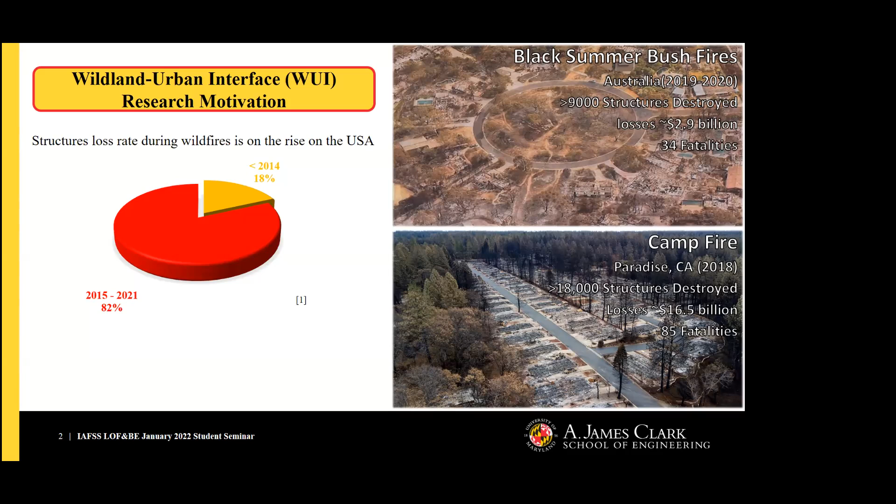So when we look at the research motivation for wildland urban interface fires, typically in the media we see these huge flames, thousands of acres burned. But one thing that's not very accurately captured is the socioeconomic impacts of these wildland fires, with structure losses being one of them. And in the US, there's this compelling statistic that structure loss rate is on the rise, with more than 80% of structures lost within the last 6 years in California. So there's an urgent need to design structures in wildfire-prone communities that can withstand and survive wildfire events.

So when we think about wildland urban interface fire exposure conditions, they typically characterize them into 3 distinct categories: direct flame contact, radiation, or in my case, which I'll be focusing on, firebrands. Post-fire studies also indicate that the ignition of structures due to firebrand exposure has significantly contributed to fire spread within the WUI. So what are firebrands?

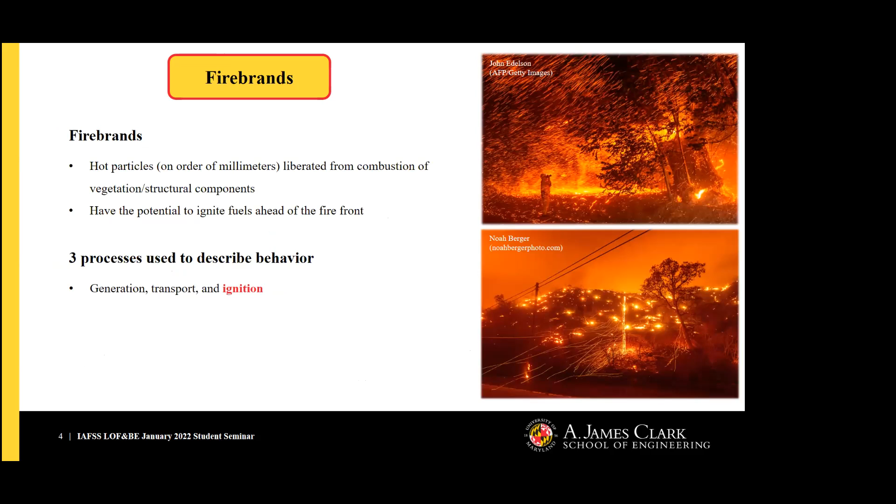They are typically hot particles in the order of a few millimeters, liberated from the combustion of vegetation or structural components, and they have the potential to ignite fuels ahead of the fire front. There are 3 processes used to describe their behavior, typically generation, transport, and ignition, which I'll be focusing on. And then materials that have been used for decks have also been identified as being susceptible to firebrand attack.

So when we consider a few previous firebrand ignition studies that have looked at both singular firebrands and firebrand piles, these post-fire investigations have found that firebrands tend to accumulate in groups. Manzello and Associates has also led a very successful campaign looking at the ignition of common materials when exposed to firebrands, looking at everything from airflow, firebrand pile loading, size, and structural configuration.

Two researchers at the University of Maryland also looked at quantifying the transient heat fluxes from firebrand piles, noting that both increasing the firebrand pile coverage density and the airflow velocity increases the peak heat flux to the surface on which it's exposed. But one thing that a lot of these studies lack is that most firebrand ignition studies do not couple the ignition behavior of a material with the thermal exposure effects of the pile.

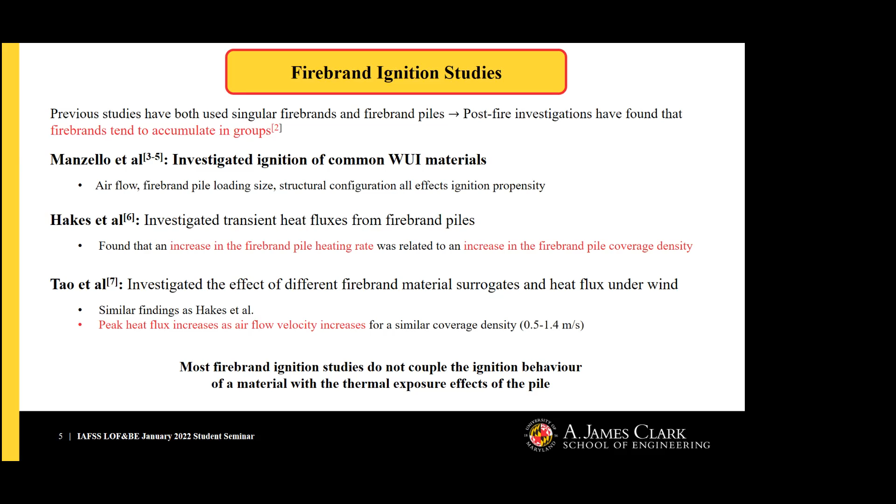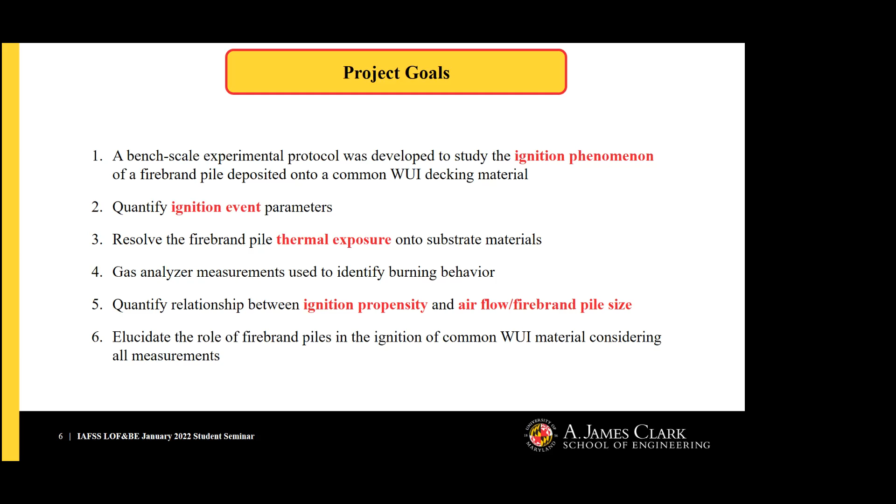So the goal of our project was to design a bench scale experimental protocol to study the ignition phenomena of firebrand piles deposited on WUI materials, to quantify the ignition event parameters like burn time, ignition propensity, to resolve the firebrand pile thermal exposure when deposited onto a material, using gas analyzer measurements to identify burning behaviors, to quantify the relationship between the ignition propensity and airflow or firebrand pile size, and to elucidate the role of firebrand piles in the ignition of common WUI materials, considering all these measurements.

So as I mentioned, we developed the bench scale wind tunnel, and it can be separated into 3 main sections: a contraction cone, a test section, and an exhaust. When we consider the contraction cone, this is where our fresh inlet is, the inlet for our fresh oxidizer, which is moved through a reducer. And it then also comes with a honeycomb mesh, which straightens and laminarizes the flow before it's pushed into the test section.

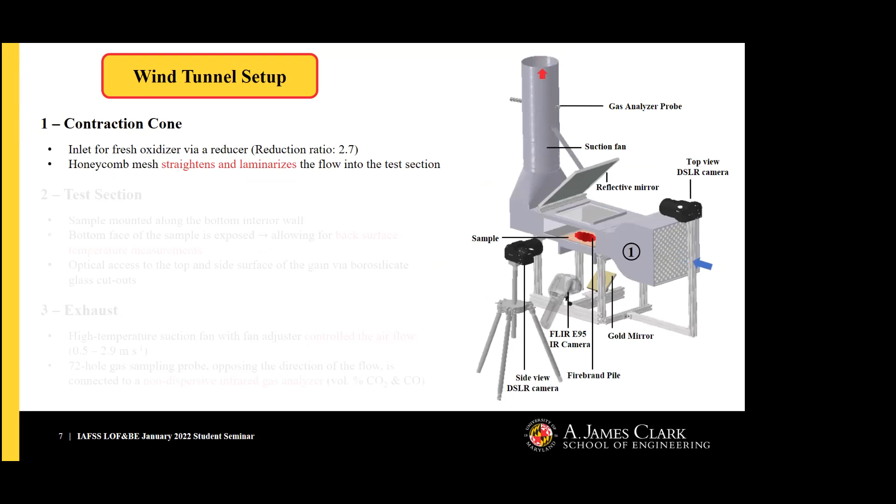So when we consider the test section, this is where the sample is mounted along the bottom interior wall of the test section. The bottom face of the sample is exposed, allowing for back surface temperature measurements using a FLIR E95 IR camera, with a gold mirror also being used to redirect the view of the camera to the back surface of the material.

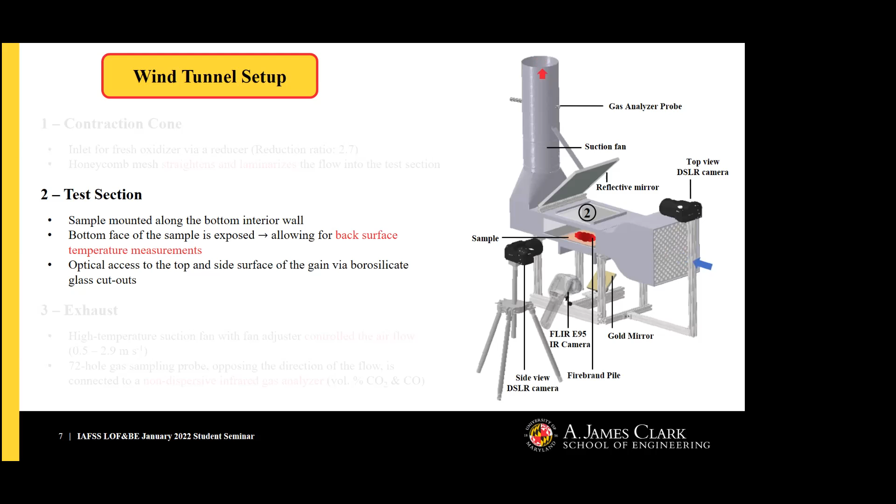Optical access to the top and side surface of the material is gained via borosilicate glass cutouts, with the ignition events recorded using 2 DSLR cameras.

In the exhaust, we have a high temperature suction fan with a fan adjuster to control the airflow, and a 72-hole gas sampling probe, installed to oppose the direction of flow, connected to a non-dispersive infrared gas analyzer used to measure volumetric carbon dioxide and carbon monoxide concentrations.

So just a quick overview of how we run these experiments. The material substrate is placed within the tunnel, the airflow velocity is set, and the firebrands are prepared. The gas analyzer data logging system is used, and the video and IR recordings are initiated. We also make use of back surface temperature measurements.

We deposit our firebrands on the top surface of the material. The back surface is coated with a high emissivity, high temperature black coating, and that's how we actually measure our temperatures. The glowing firebrands are then deposited onto the sample material, the tunnel is sealed, and the experiments proceed until all firebrands are consumed.

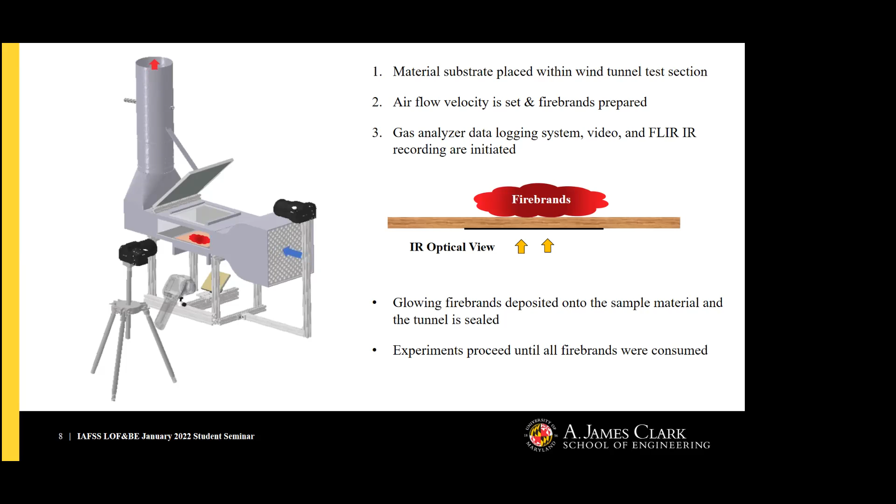The material substrates we considered: we looked at two different substrates, one being Kaowool PM insulation board. This material was selected as it was used to adequately resolve the heat exposure from the firebrand pile. It was also relatively thin, having a fast response and a thermal characteristic time on the order of about 27 seconds. The material is also non-combustible, allowing us to isolate the firebrand pile thermal exposure and burning dynamics.

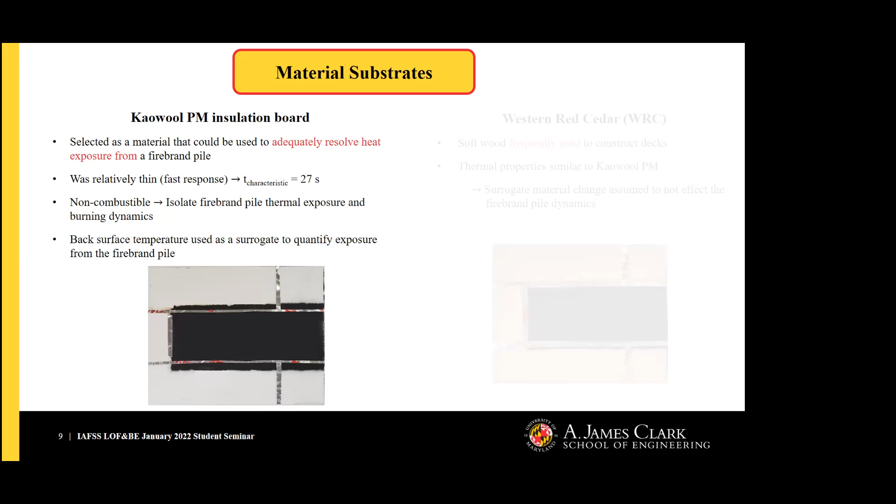The back surface temperature measurements were used as a surrogate to quantify the exposure from the firebrand pile. We also made use of our second material, Western red cedar, a combustible softwood frequently used to construct decks. It was used as its thermal properties were similar to that of the insulation board.

When we move on to our test matrix, we considered two different firebrand pile coverage densities: a smaller firebrand pile representative of a single layer, and a larger firebrand pile indicative of increased hazard. The material surrogates were Kaowool and Western red cedar, with the back surface coated with a high temperature high emissivity paint. We also made use of 4 airflow velocities in the range of 0.9 to 2.7 meters per second, and conducted 9 tests for each condition, equating to a total of 108 tests.

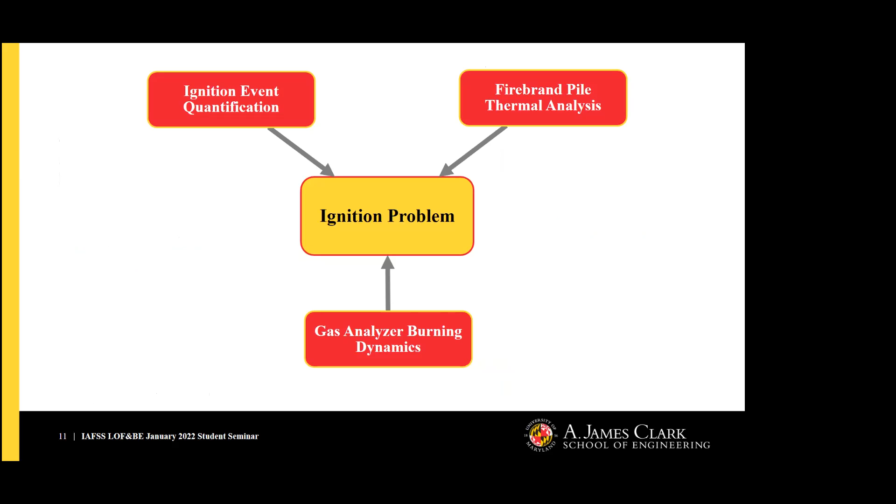When we look at the ignition problem for Western red cedar when exposed to firebrand piles, we separated it into 3 distinct categories: the ignition event quantification, firebrand pile thermal analysis, and gas analyzer burning dynamics, to more accurately quantify and understand the process.

When we look at our ignition events, 2 distinct ignition events were considered: the firebrand pile ignition, and the ignition of the Western red cedar surface. The firebrand pile ignition is indicative of a flame located on top of the pile, typically blue in color. It did not spread further than the pile or result in any noticeable burning dynamic changes, and we concluded that it doesn't pose any increased hazard.

In the case of Western red cedar surface ignition, we noticed that it's more likely to lead to fire growth due to direct engagement of the flammable substrate. It is indicative of the presence of a diffusion flame, typically amber in color, attached to the surface of the board, extending along the length of the board and preheating the surface.

When we consider the flaming ignition location, we noted that the majority of ignitions occurred within or in front of the leading edge of the firebrand pile. This is a result of the front of the pile being directly exposed to the airflow, which promotes smoldering of the board and increased firebrand pile temperature. The surface in front of the pile, free of firebrands, is also directly exposed to the thermal insult from the pile.

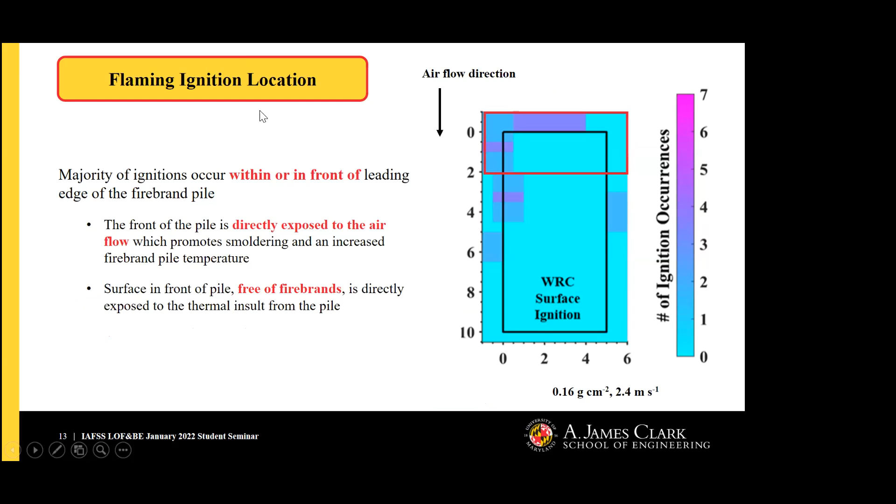Okay, when we now look at the surface ignition probabilities, we noticed that by increasing your firebrand pile coverage density from the smaller to the larger pile, we saw a drastic increase in the ignition probability.

Then looking at the increased or larger firebrand pile mass, we noticed that it was affected by changing the airflow velocity. As the airflow velocity increased, we saw an increase in the ignition probability up to a critical point, after which any further increase in airflow velocity resulted in a decrease in ignition probability.

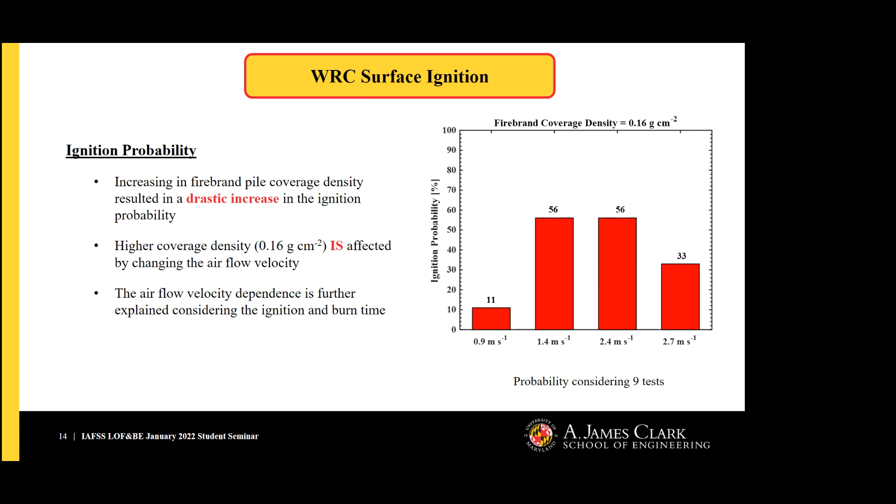If we also look at the ignition time, we note that there is a decrease in ignition time with an increase in airflow, and then a rapid increase with any further increase in airflow. This rapid decrease is attributed to the increased firebrand pile oxidation rate at the surface of the board. As we reach this critical point and increase our airflow, convective cooling and dilution of the Western red cedar pyrolyzate starts to affect our ignition times. Again, this is a qualitative trend where we see a decrease or an increase followed by a decrease.

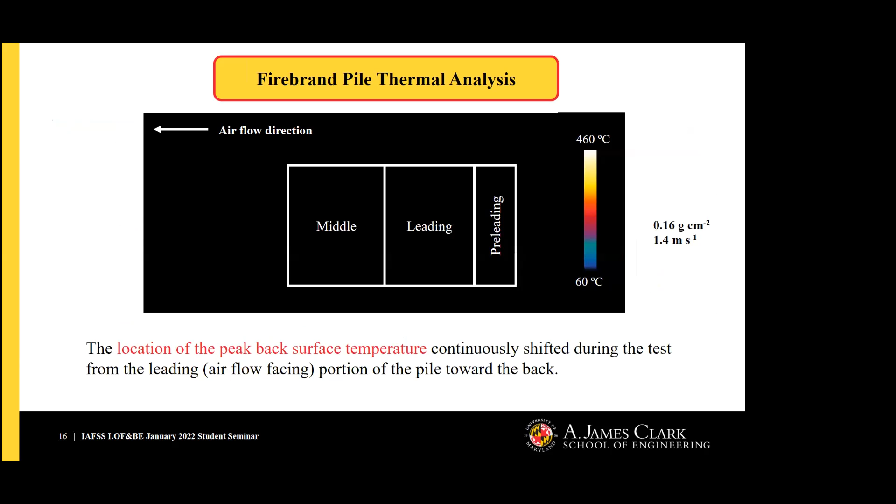When we move on to the thermal analysis of a firebrand pile, as I mentioned, we used Kaowool as the material surrogate. We separated the firebrand pile deposition area into three distinct zones: a leading zone, a middle zone which is underneath the pile, and a pre-leading zone, which was the zone in which we saw most of our surface ignition. It was noted that the location of the peak back surface temperature continuously shifted during the test, from the leading portion to the back portion of the pile.

When we consider some average thermal profiles for our Kaowool firebrand pile thermal analysis, this is just a representative case for a larger pile at 2.4 meters per second. We note that both the leading and pre-leading edge temperatures increase and then rapidly decrease, while our middle zone actually increases and holds steady for quite a long period of time.

It should also be noted that in the time frame where we note our peak back surface temperatures, this is also the time frame where we note most of our ignition events.

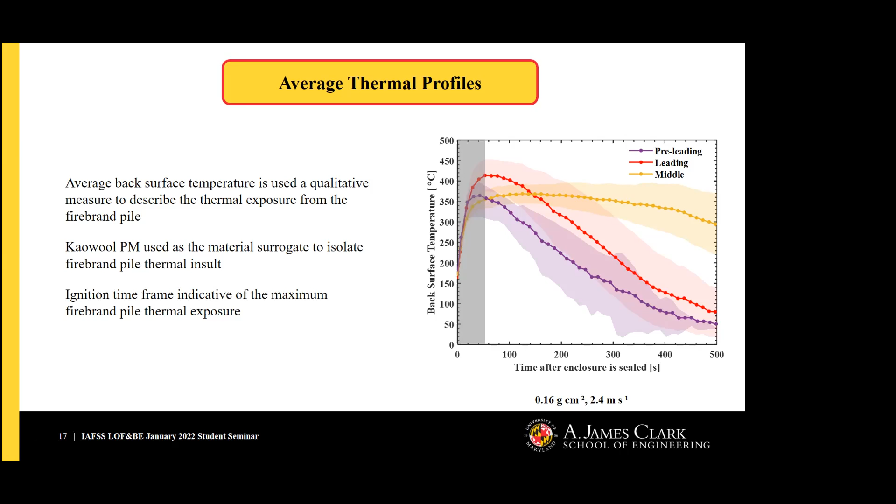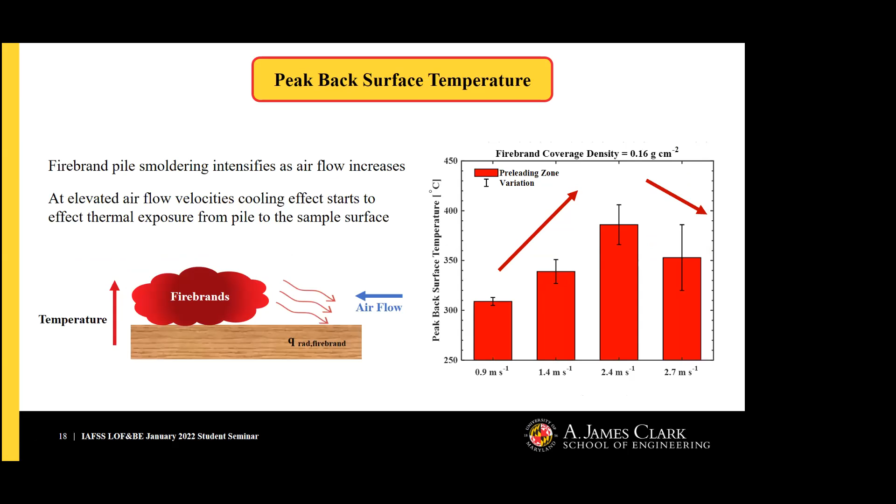Moving on to the peak back surface temperatures, the firebrand pile smoldering intensified as the airflow increased. This is for our larger pile mass. Then at elevated airflow velocities, a cooling effect starts to affect the thermal exposure from the pile to the sample surface. This behavior of an increase until we reach a certain airflow velocity followed by a decrease is also representative of what we saw for our ignition probability, where at elevated airflow velocities there's actually a decrease in the ignition probability of our board.

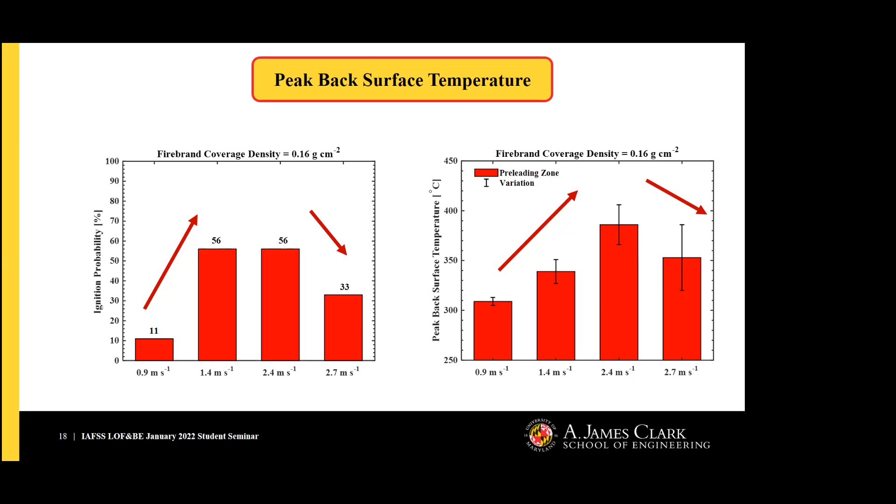Finally, we consider our gas analyzer burning dynamics. The gas analyzer measurements comprise volumetric percentages of carbon dioxide and carbon monoxide, and they were used to elucidate the burning dynamics of the firebrand pile and Western Red Cedar. The heat release rate is typically a parameter used to describe the intensity of burning, and was calculated considering the energy coefficients for carbon dioxide and carbon monoxide and our mass flow measurements of both CO and CO2.

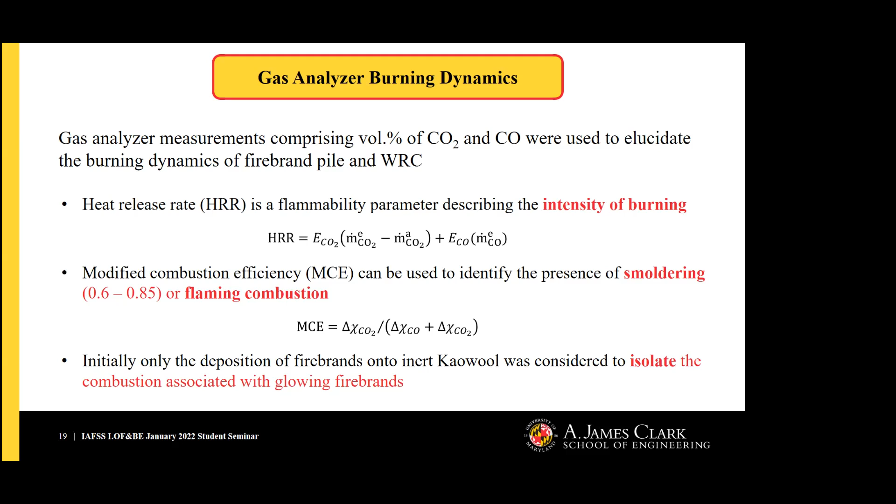The second parameter we considered was the modified combustion efficiency, which can be used to identify the presence of smoldering or flaming, with literature indicating smoldering in the region of 0.6 to 0.85. Initially, only the deposition of firebrands onto the inert Kaowool was considered, to isolate the combustion associated with our glowing firebrands.

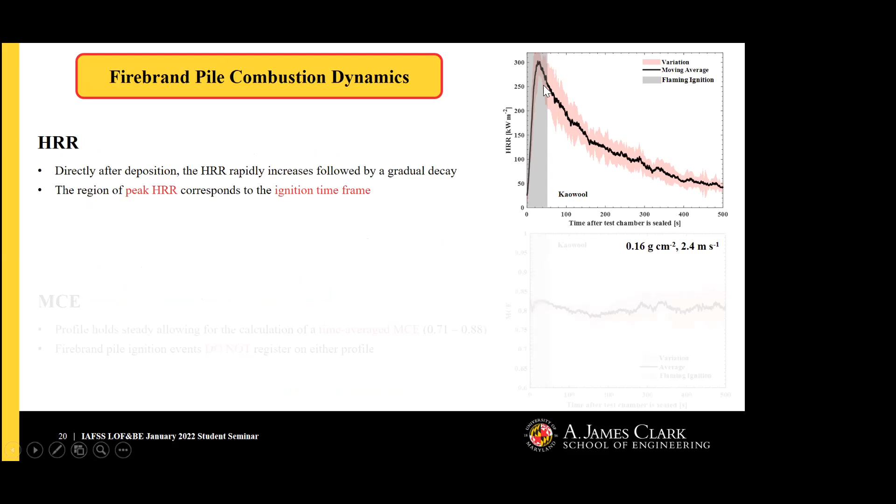So when we consider the firebrand pile burning dynamics, looking at the heat release rate, directly after depositing the firebrands, the heat release rate rapidly increases, followed by gradual decay. We also noted that the region of peak heat release rate is in the same region in which we see our ignitions. Moving on to the modified combustion efficiency, for all our different testing conditions, we noted that it actually held pretty steady.

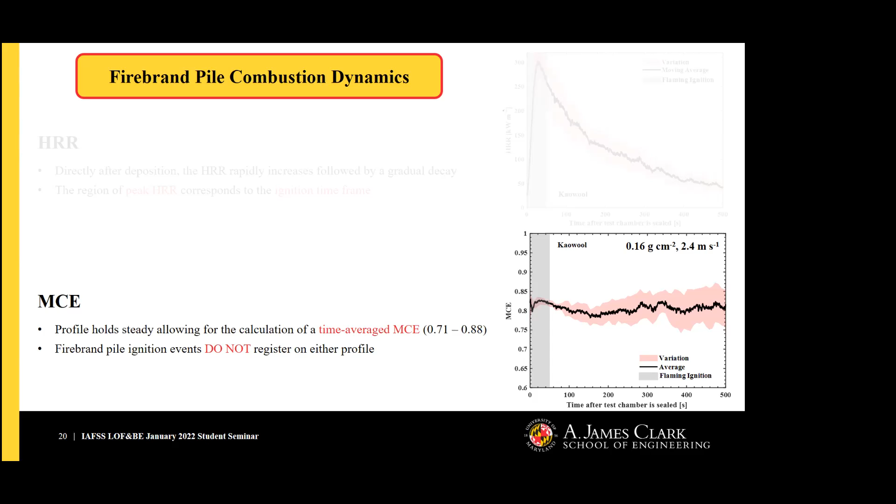This allowed us to calculate a time-averaged MCE for all our testing conditions, which ranged from 0.71 to 0.88, typically in the range of smoldering ignition. The firebrand pile ignition events, however, did not register on either of these profiles. We identified earlier that this ignition event doesn't pose any hazard, and the MCE results actually show that.

Moving on to taking our Kaowool to Western Red Cedar gas analyzer measurements, the firebrand pile Western Red Cedar system burning dynamics was considered, assuming that changing the substrate would not alter the burning dynamics of the firebrands. The Western Red Cedar contribution was isolated by subtracting the system transient carbon dioxide and carbon monoxide volumetric percentages from the Kaowool firebrand pile profile. So on the left-hand side, we see our Kaowool profile on the order of about 300 kilowatts per square meter.

It's normalized also by the deposition area of the firebrands. We take our combined system of firebrand piles and Western Red Cedar, subtract out our Kaowool from our left, and then get the figure on our right, indicating an average profile with the uncertainty or variation of our carbon dioxide and carbon monoxide volumetric profiles.

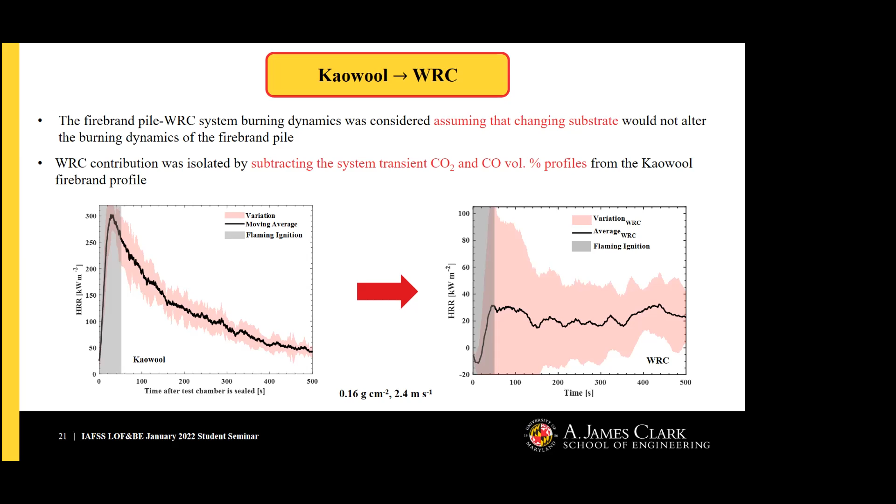The uncertainty is pretty large because we were actually able to pick up or detect the flaming ignition events on the surface using our gas analyzer profiles. And then lastly, the MCE for our Western Red Cedar.

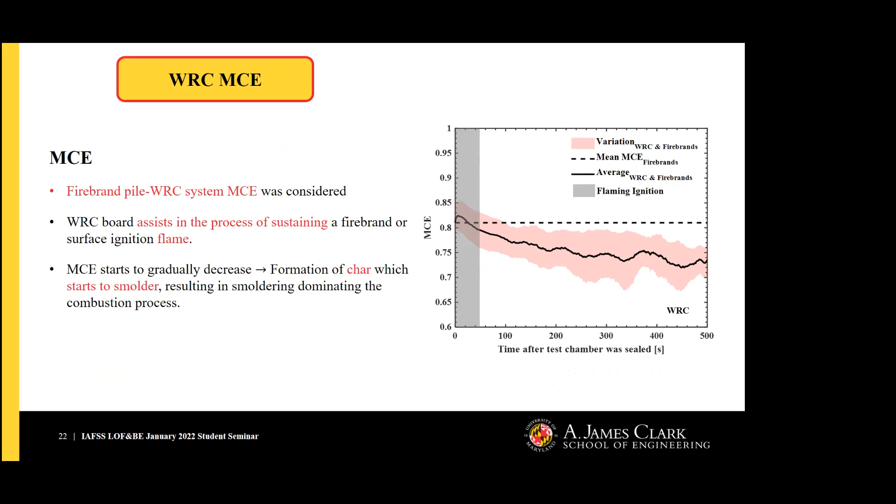The firebrand pile Western Red Cedar system modified combustion efficiency was considered. It wasn't separated. The Western Red Cedar board initially assists in the process of sustaining a firebrand or surface ignition flame, as seen by an increase in our MCE within the region where we see ignitions. And then the MCE starts to gradually decrease as a result of the formation of char, which starts to smolder, resulting in smoldering dominating the combustion process.

So in conclusion, a bench scale experimental protocol was developed to study the ignition vulnerability of Western Red Cedar when exposed to glowing firebrands. The Western Red Cedar surface ignitions were considered more likely to contribute to fire growth. Our firebrand pile heat release rate was orders of magnitude larger than our Western Red Cedar heat release rate, which is dominated by smoldering. Ignitions occur in the front or at the leading edge of the firebrand pile.

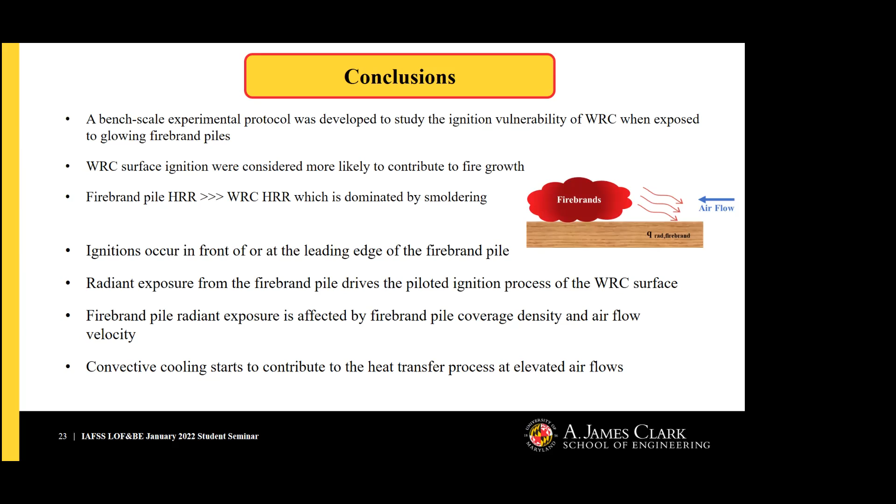This is a very interesting discovery. The radiant exposure from the firebrand pile drives the piloted ignition process of the Western Red Cedar in front of the pile, as noted in our diagram. And the firebrand pile radiant exposure is also affected by the firebrand pile coverage density and airflow velocity. And then at elevated airflow velocities, convective cooling starts to contribute to the heat transfer process.

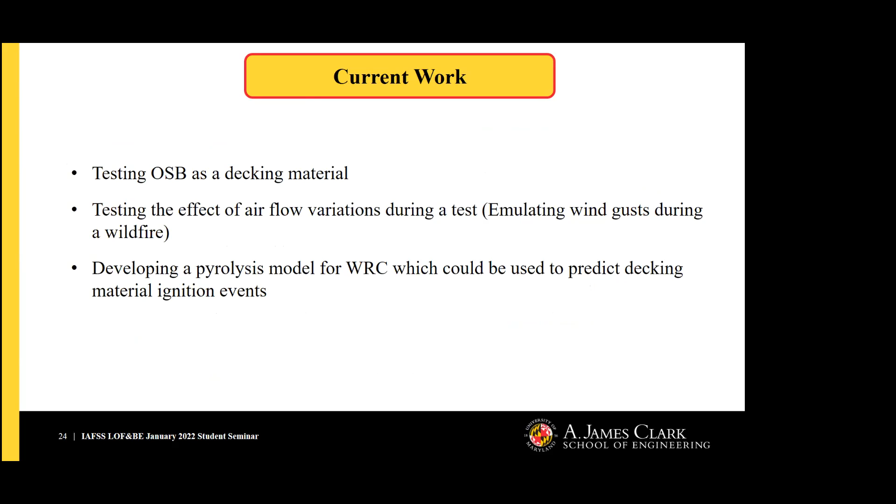So just some recent work that we're busy with, we're actually testing OSB as a decking material. We're testing the effect of airflow variations during a test, thus emulating wind gusts during a wildfire. And then I'm also developing a pyrolysis model for Western Red Cedar, which can be used to predict the decking material ignition events in actual wildland fire events.

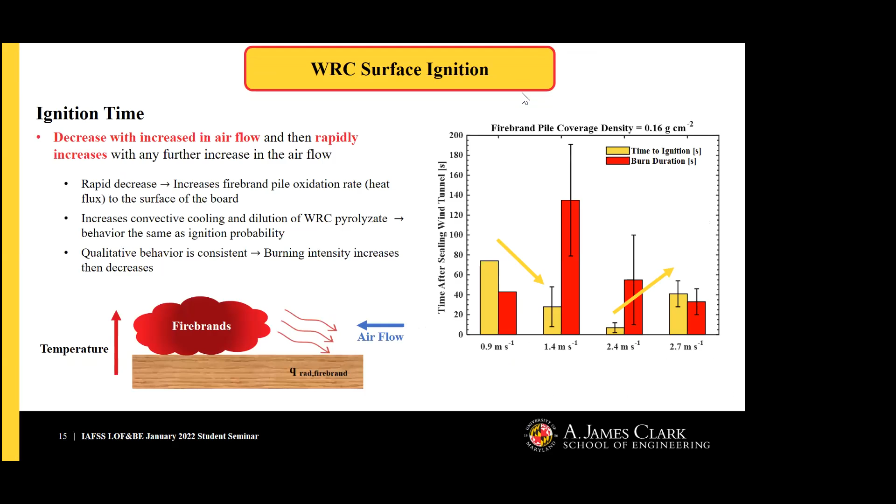Yeah, I can try and elaborate on that. So what we do is, I'll just go back to this diagram, we'll use this as an example. So we coat the back surface with a known emissivity black optical coating, which we've also validated using thermocouple measurements under a radiant heater coil at a known heat flux. So we quantify our emissivity, and we also note that the emissivity doesn't change with temperature over the range that we're expecting at the back surface.

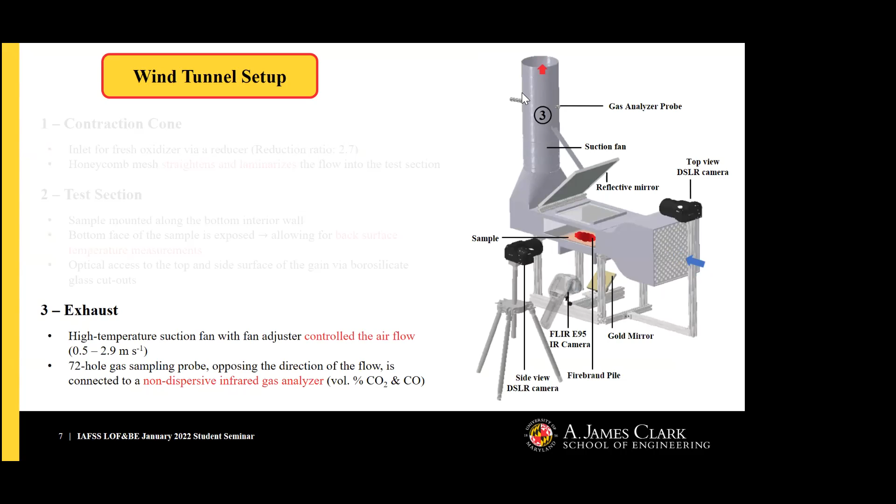And then we just literally position our FLIR IR camera onto the gold mirror with a quantified reflectance, and we then capture the back surface temperature of the firebrand piles, as we see in this image. Oh yeah, here, if that answers the question. So it's all about quantifying the emissivity of the back surface. And obviously we have it as a peak back surface temperature, and I'm actually working on inversely analyzing it to get the front surface temperature, because obviously there's some sort of temperature delay between the front and back surface on which the firebrands are actually deposited.

Right. Cool. I'm assuming your gold mirror is just some kind of gold-plated surface, right? Exactly. Yeah, exactly. Yeah, that sounds expensive otherwise.

There was another question in the chat box: how were you able to make sure you had enough mixing for your gas system? That's a good question. Obviously, typically in cone calorimetry experiments, correct me if I'm wrong, but I think it's like 6 diameters downstream of the actual material. And we were confined because this whole experiment is positioned within a fume hood, so we only had so much space to work with. But we did actually validate our gas analyzer measurements using known composition gases.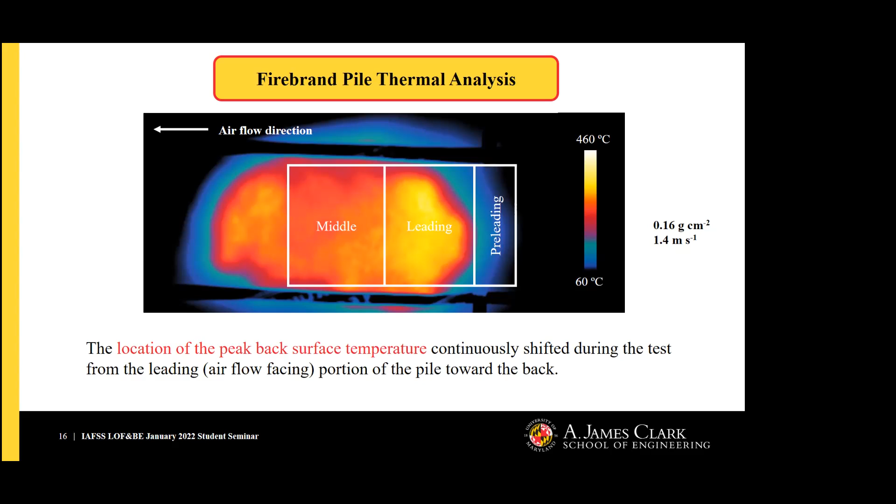So we took a bottle of carbon dioxide and carbon monoxide with a known composition, and we would take measurements and validate it was about a distance of about a foot away from our suction fan, to see if we would get the same measurements as what we're actually purging into our test section. And we validated, I think, within a very close variation—I can't give the exact value right now. But we did validate that to ensure our mixing within the test section, or downstream of that, was enough to ensure we had a well-mixed system. And obviously the turbulence of the fan also increases the mixing of the entire test section.

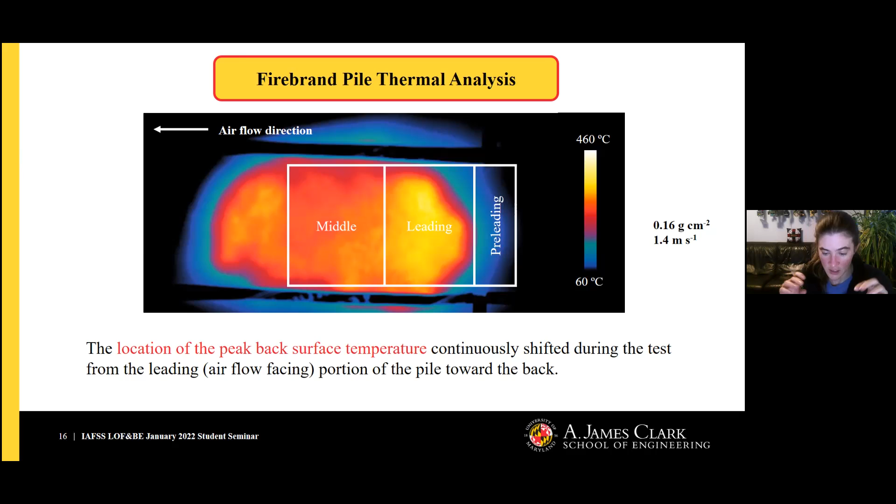We don't have any other questions in the chat box, but I have a really quick one. I was intrigued by the pictures you showed of the ignition events, and how when ignition happened in the firebrand pile, it looked to be more often a blue flame. Was that always the case, regardless of airflow and pile size? Yeah, so typically when we deposit the firebrands and seal the tunnel, we see this flame originate, and depending on the airflow and the firebrand pile coverage density, it depends on how long it sustains there. But in most cases, for the larger pile, we'd see this formation of a blue flame on the pile, and then we'd see the second ignition event where the actual surface of the board starts to engage.

Right. So why do you think it's blue? It's interesting.

That's a good question—we've been speculating about it. Obviously, we could do more measurements, but it might potentially be that carbon monoxide, when it burns, typically burns blue. I'm going off a whim here, but I believe Quintiere has a paper on that, though I'm speaking under correction. That's just a hypothesis. Sounds reasonable to me.

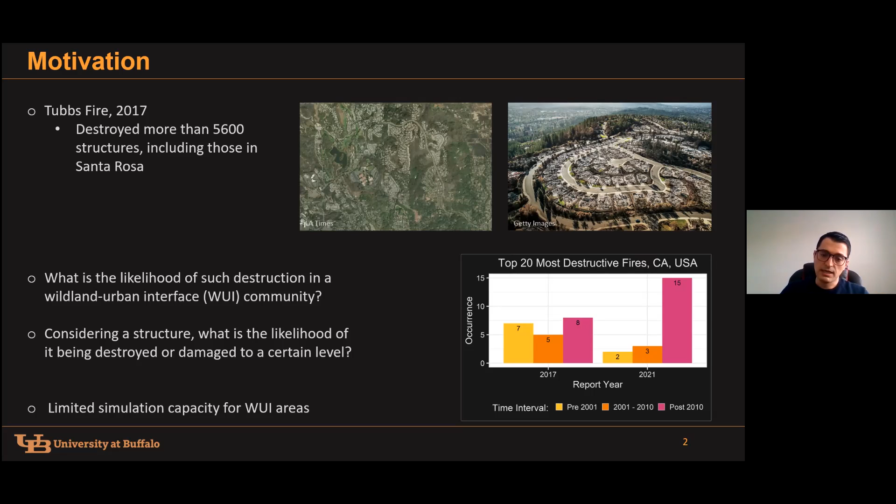We also had a Marshall Fire close to Denver less than two weeks ago, which became the most destructive wildfire of Colorado, albeit it wasn't that large compared to what we usually think of as extreme wildfire cases.

To evaluate the risk associated with wildfires for a WUI community, we need to be able to estimate the probability of the hazard. In this case, probability of fire having a certain rate of spread or burning intensity, for example. Then we also need to estimate if our community of interest is going to be exposed to that fire, and if so, what's the response of our community to that particular fire—how vulnerable is it, how many structures are going to get affected, and how fast would that be.

Well, there are many contributing variables here. We have tons of playing factors in wildland in the first place. And then we have communities with buildings of different sizes and construction materials, various layouts and vegetation, or whether there are mitigation plans in place or not, and so on. And all of these factors come with uncertainties. On top of this, most of these factors are entangled together, and there are dynamics going on between various subsets of these variables, so we also need to take those into account as much as possible.

Now, there is a key difference between wildfire and other hazards. When an earthquake, for example, hits an area, all structures are hit by the same hazard, and their fate kind of depends on their own response and strength. But wildfire is a progressive phenomenon. So when a building catches on fire, not only do we lose that building, but more importantly, it becomes part of the hazard itself.

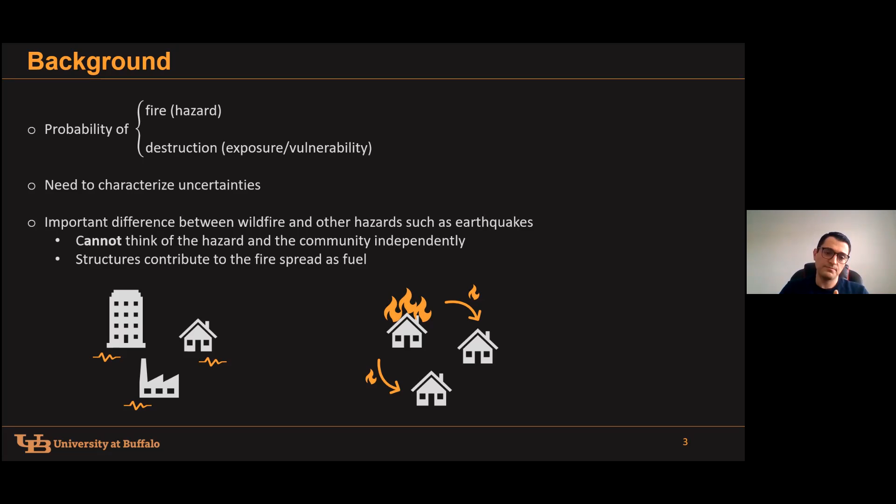Structures burn for a longer time compared to vegetation and also release more heat. Because of this important behavior, when we try to understand what would happen in a community exposed to a wildfire, we cannot separate wildfire from the community. So we cannot think only about one structure, we cannot think only about the community, we cannot think only about the wildfire, but we must consider the wildfire and the community at the same time in the same context.

So in addition to the features we already consider for wildfires, we need to take into account the features specific to the community, like the layout, the relative distance of buildings, their characteristics, their surrounding vegetation, things like that.

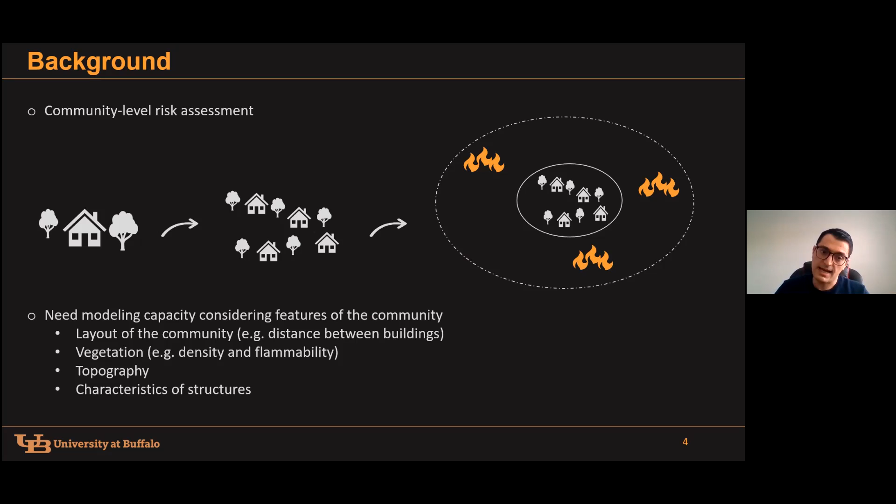To this end, we have developed the streamlined WUI fire tracing model, what we call SWUIFT. It has a spatial resolution of 10 meters and temporal resolution of 5 minutes. It considers structures as distinct fuel. So in SWIFT, we have 3 fuel models: vegetation, structure, and non-combustibles like ponds or roads, like what we see here at the right side of the slide.

This is Fountain Grove community in Santa Rosa. You can see the placement of structures and the layout of the community. SWIFT has 2 of the main mechanisms of spread implemented, fire spotting and radiation, and it also tracks the source of ignition in each building.

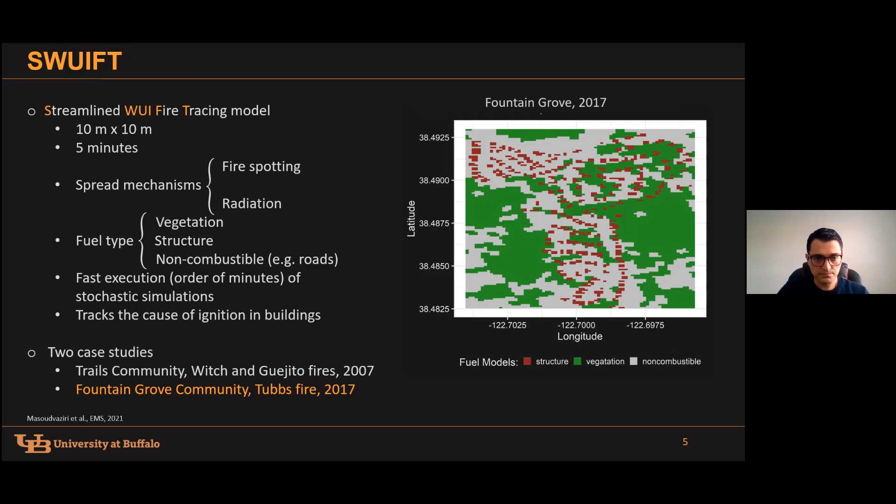One of the important features of SWIFT is its fast execution, so it takes just a few minutes to run a case depending on the domain size and the duration of fire. The model was applied on 2 case studies, which we believe represent different levels of hazard.

Having SWIFT provides us with the opportunity to conduct a stochastic analysis. The model includes different modules, each of which has some variables involved. In this version of SWIFT, we consider firebrands to be similar with the same weight, therefore we can work with number of firebrands. Wind speed is significantly influential on different stages of fire spotting, as we know, and we tried to include those effects as much as we could.

We also leveraged some of the experimental findings in the literature for ignition criteria due to firebrand. One important assumption is that we assume ignition of structures by firebrands occurs due to accumulation of particles on narrow stripes at the edges of rooftops. SWIFT also has radiation implemented, and it tracks the heat received by each building, and there will be ignition if a certain threshold is reached. Based on the available data, or in the simplest form, assuming uniform distributions, we conducted a stochastic analysis varying these parameters, shown in orange, randomly.

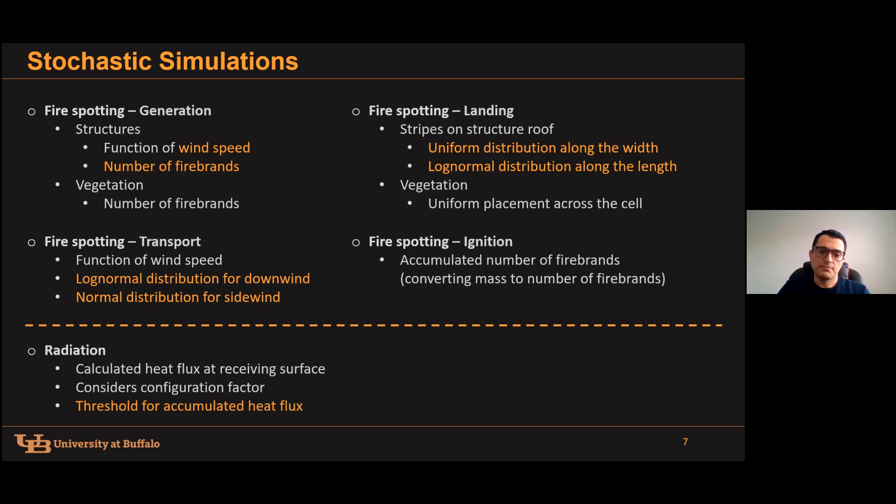Now that we have a fire spread model for community with the capacity for stochastic simulations, we can go back to the big picture and find a way to assess the risk of WUI communities for wildfires. As I stated earlier, we need to estimate the probability of hazard and the probability of what would happen in the community in response to that hazard.

So technically, we are thinking of a sequence of two spread models, one for wildland and one for community. This way, we can run stochastic simulations in wildland and estimate corresponding probabilities, then bring in those fires and run stochastic simulations for each using the community model. This gives us the ability to evaluate loss by conditioning certain levels of outcomes, like damages, to certain levels of hazard.

Hopefully soon enough, the research community will reach a modeling capacity where we can have details of both parts, outside and inside of the community, implemented in one platform. But until that time, this I think is the way to approach the problem.

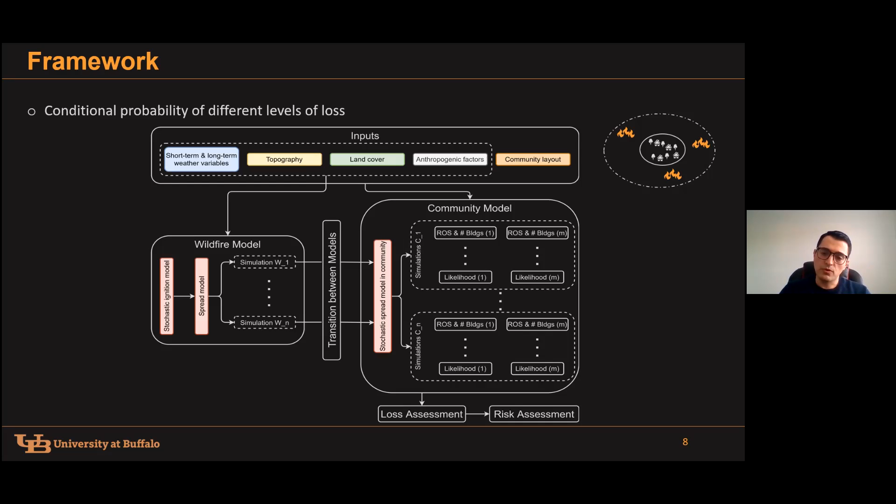To showcase how the result of this procedure would look, we conducted the stochastic analysis of the community for one wildfire, only one. This is the case of the Tubbs fire for the Fountain Grove community. We define the loss in the simplest way, a binary of whether a building ignites or not. Ideally, with more detailed data, we should define multiple levels of damage in future versions, which is one of our research questions.

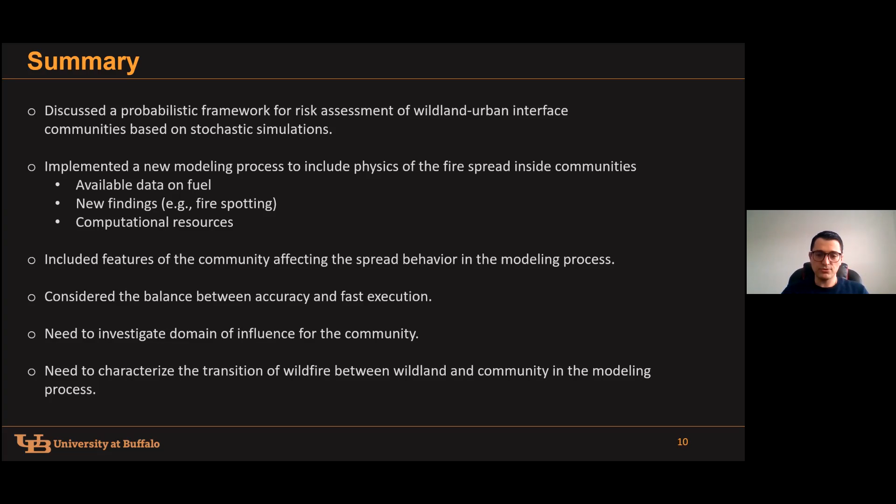This is ongoing work with important unanswered questions and further details to be implemented, but that's actually what motivates us to continue this work.

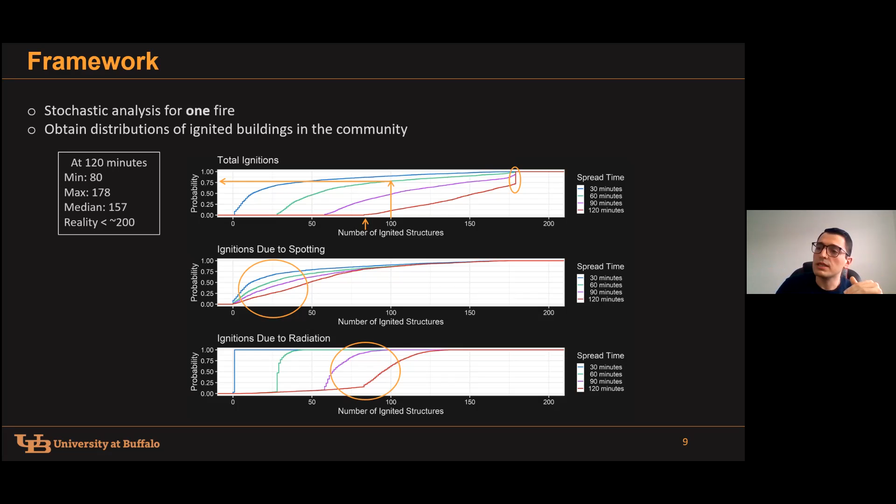Gotcha. Another question asks: in the modeling of inter-building fire spread, are you also including the effects of landscaping and ancillary structures and fencing? That's an absolutely great question. At this point, because of the limited inputs we work with, we only have one fuel model representing structures. So if we have a structure, it's going to be represented the same way as any other structure we have. But with further details, we can implement these details into the model as well. So at this point, it's just a structure, one type, no further details.

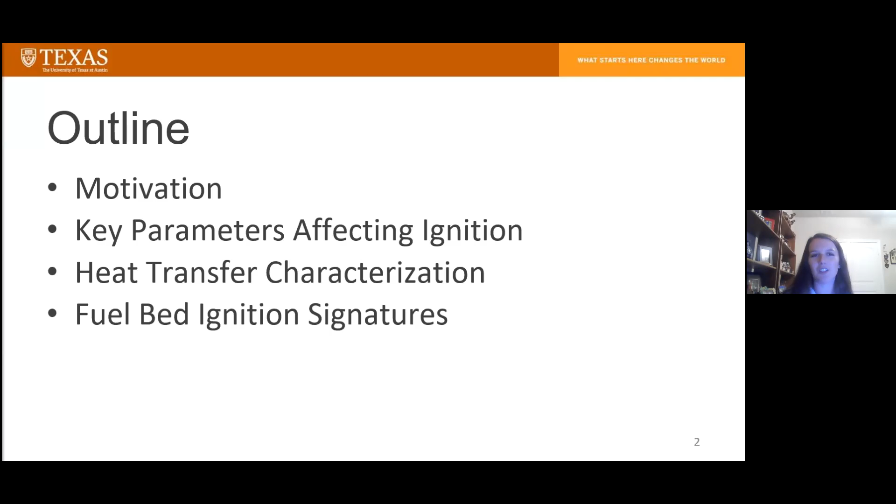I'll be talking about some key parameters that we found affect ignition, some heat transfer characterization, and fuel bed ignition signatures.

Our previous presenters did a really great job of going over the motivation of why people want to study wildfires, so I'll just briefly go through this. Looking specifically at the US, we've seen over the past few years that thousands of structures have burned down, many of them residences. So the ignition of a home is really important to people's livelihoods, something people worry about in their day-to-day lives. Here we'll look specifically at how wildland fires transition to homes through firebrand contact.

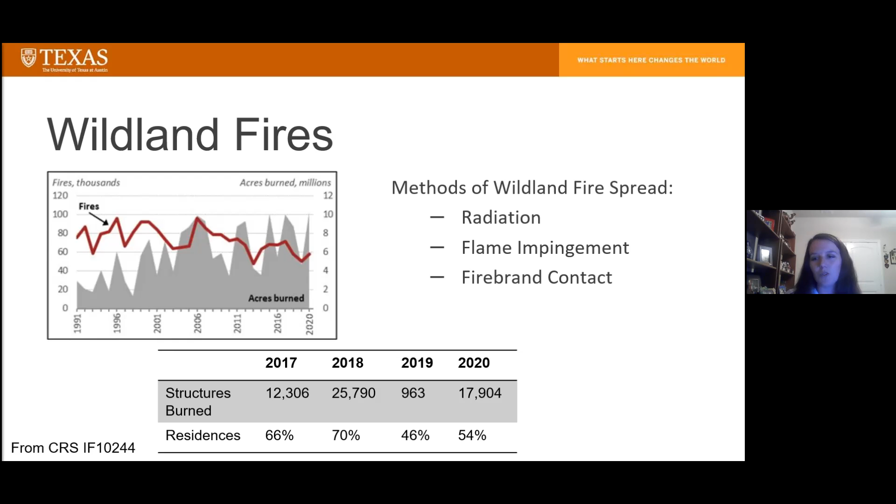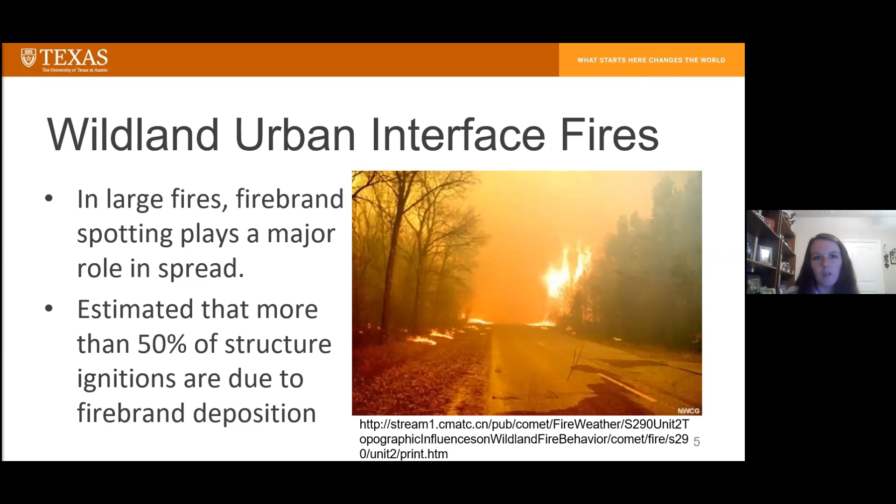So in large-scale fires, firebrand spotting plays a major role. Here we can see a picture of some spot fires jumping a natural break in fuel. It's estimated that more than 50% of structure ignitions in wildland urban interface fires are due to firebrand deposition. These lofted firebrands can ignite homes through a variety of methods, such as debris-laden gutters, flammable roofs, or penetration into attic vents. But we're still looking at what mechanisms are involved in that ignition due to firebrand deposition.

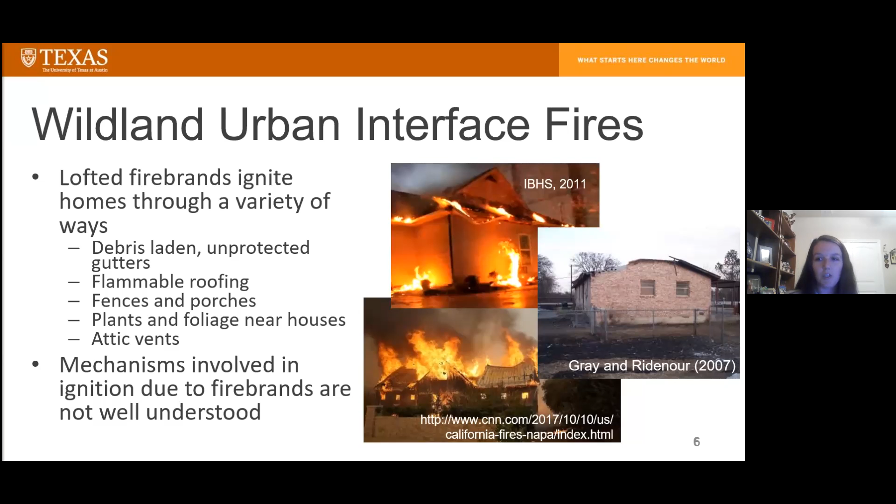My research, more specifically, the questions I wanted to answer in grad school were: what are the hazards associated with firebrand deposition in the WUI, and what threats do firebrands pose to structures in the WUI? More specifically: what physical phenomena affect the ignition of attic insulation materials? What mechanisms affect the heat transfer between a hot body and a substrate? And what methods can be used to determine if ignition has occurred in a fuel bed?

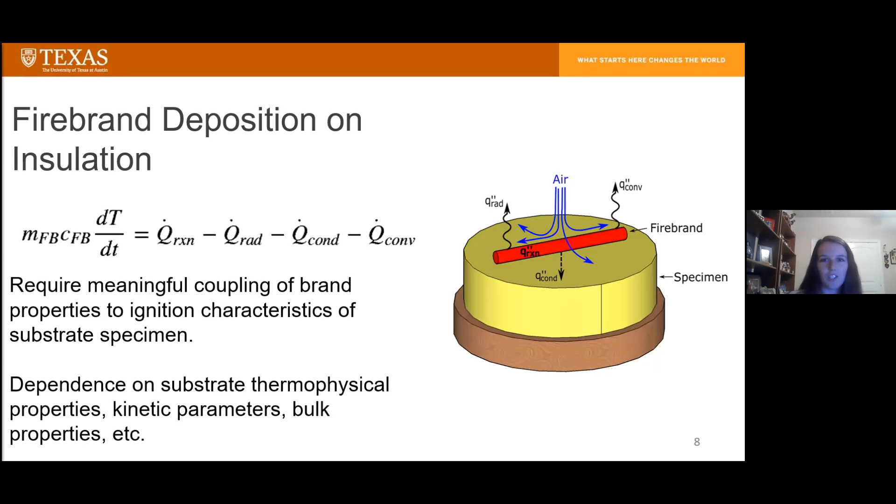Looking at my first set of experiments, I did firebrand deposition experiments to look at the key parameters affecting ignition. If we're just looking at a firebrand deposited on a substrate, we can see this energy balance here - the firebrand reacting or interacting with the substrate and the environment. We need a meaningful coupling between the brand properties and the ignition characteristics of the substrate, looking at radiation, convection, and conduction, and also the reaction within the firebrand.

So a simple experimental setup was designed. Here we have a furnace where our firebrands were generated, either a single large firebrand or 5 smaller firebrands in a pile with the same initial mass as the single large firebrand. They were placed in a furnace and allowed to heat up to auto-ignition, then allowed to flame out within the furnace before being placed as a glowing red firebrand onto the substrate material inside an airflow chamber with an impinging jet flow.

The firebrand was allowed to burn out within the furnace so that any ignition events and flames we saw within the test chamber were from the substrate and not the firebrand.

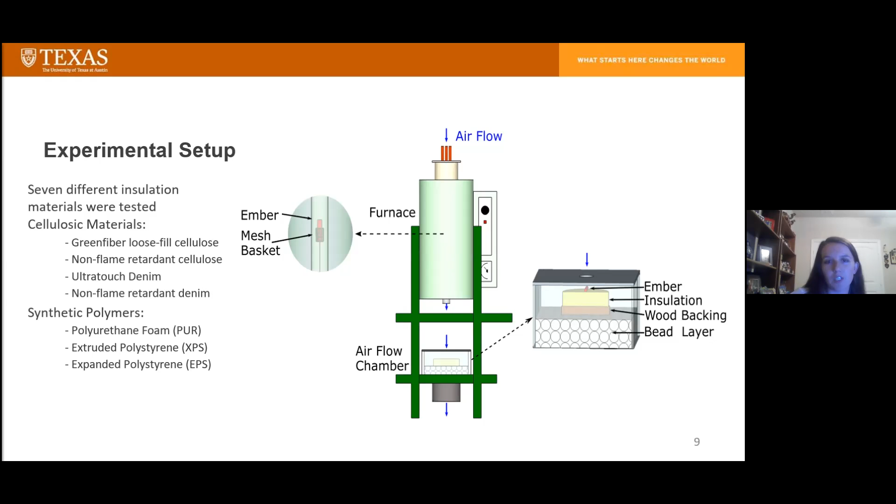Seven different attic insulation materials were tested, with three different airflow conditions: natural convection and two induced flow cases. These are the experimental observations.

Flaming was observed in the cellulosic attic insulation materials for the induced flow cases. Flaming ignition events were never observed for the natural convection cases. The cellulosic materials at the top were denim, non-flame retarded denim, cellulose, and non-flame retarded cellulose.

Flash flaming, which was just brief flames that quickly went out, was observed in the polyurethane and the two polystyrene insulation materials.

For the cases where there was flaming, the time to ignition decreased with increasing airflow, and the fragmented firebrand piles generally had faster times to ignition than a single large firebrand for the same airflow and material.

From this, we saw that the firebrand configuration, whether large or fragmented, and the airflow conditions were the key factors in substrate ignition.

We wanted to find a simple model that could provide recommendations on the propensity of an attic insulation material to ignite. So first we wanted to predict the firebrand temperature evolution.

Here we're looking at the energy balance on a firebrand. In the top equation, we're balancing the smoldering source term from the firebrand with its convective and radiative losses. The bottom equation models the radiation as a two-surface enclosure, and the pile of firebrands was modeled as a hemisphere.

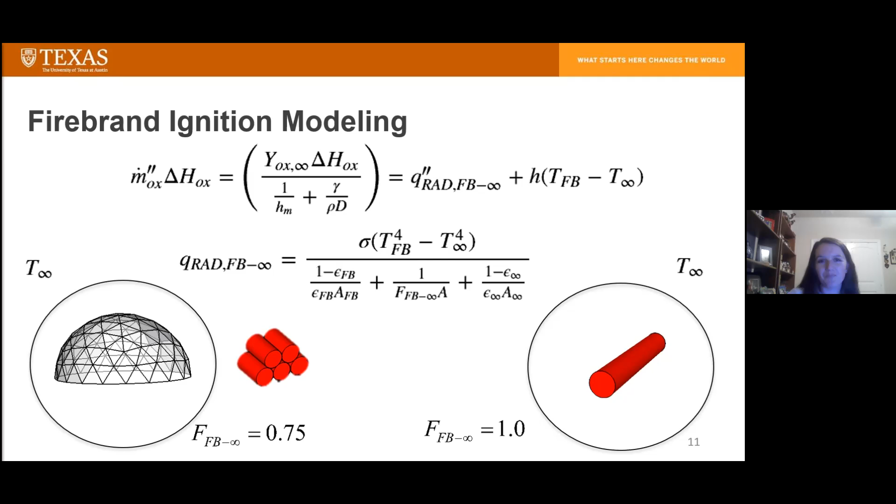We also needed to look at the ignition model for the substrate. We balanced the radiation from the firebrand into the specimen with the sample pyrolysis and the conduction into the sample.

At early times, the radiation-conduction balance resulted in low specimen temperatures, but then there was an increase in specimen temperature with time.

The terms highlighted in red would be material specific to the substrate, and we needed to parameterize them somehow. We used TGA experiments and cone calorimetry, which, for the sake of time, I'm not presenting the specific results for each experiment or material.

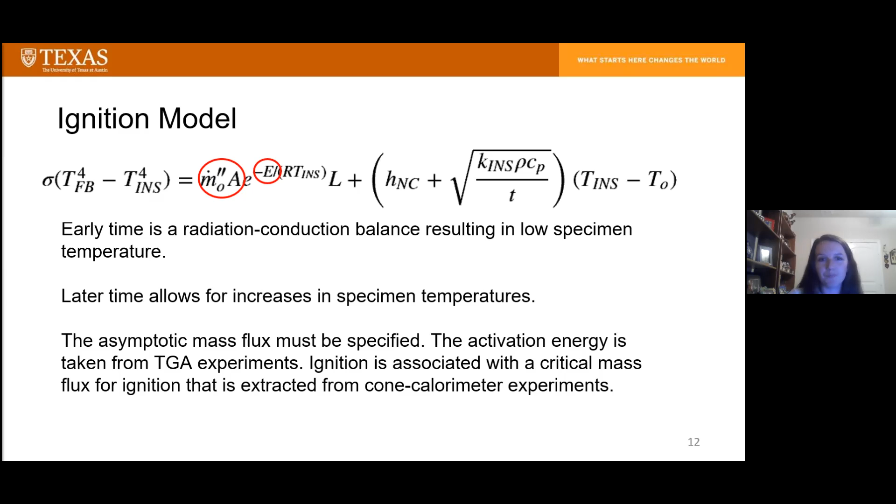This is the result of our ignition model. On the right-hand side, we can see the temperature of the firebrand, which is the red line at the top, the hotter line, and the substrate temperature is the blue line.

Below is the mass flux based on the substrate temperature, and here the ignition criterion we used was based on mass flux.

Looking at the results over time, we saw earlier, more vigorous ignition as airflow increased and with the fragmented firebrands versus the single large firebrands. This model did predict that ignition would occur with the three synthetic polymeric insulations, which were the two polystyrenes and the polyurethane.

But this model does not have any parameters for melting, so that would need to be accounted for, which makes it a little inaccurate in that case. It might mean that flash flaming would occur around those times due to the melting.

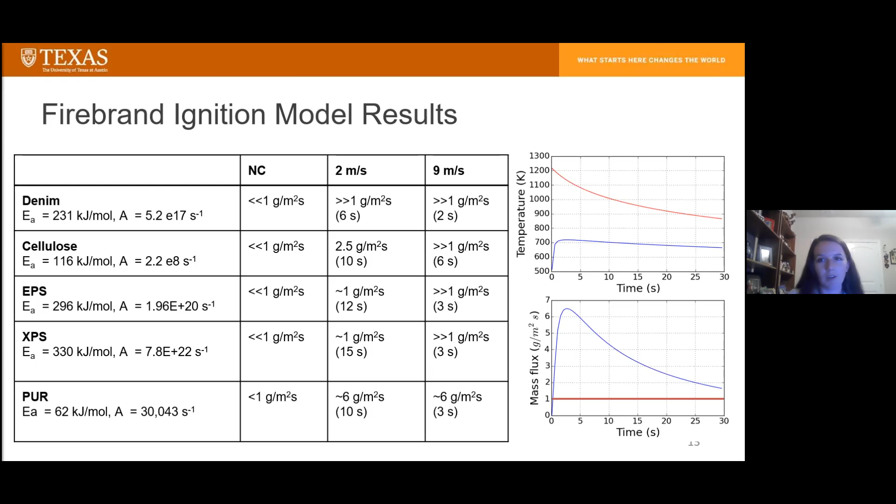These experiments conducted on firebrand ignition of insulation materials showed an increase in ignition likelihood with increased firebrand fragmentation and airflow rates.

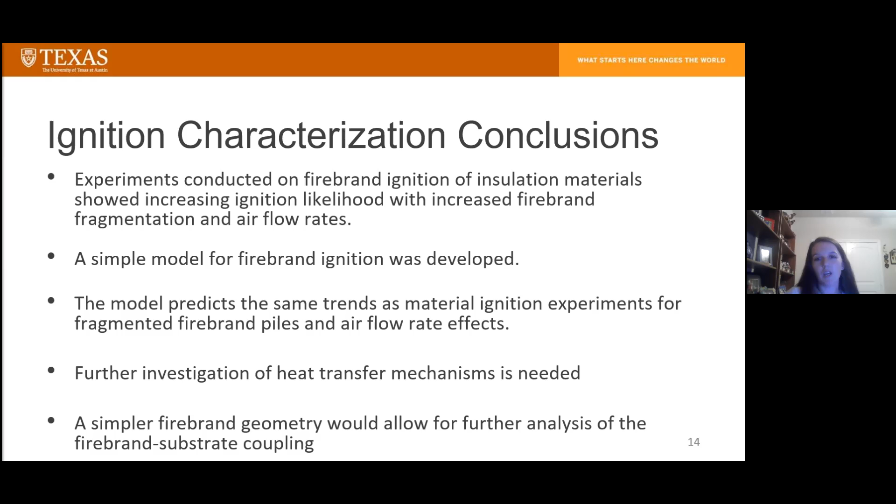We developed a simple model for ignition, and it predicted the same trends as the material ignition experiments. Further investigation is needed into the heat transfer mechanisms, and a simpler firebrand geometry would allow for further analysis of the firebrand-substrate coupling.

Moving on, I also looked at the heat transfer characterization of a hot body deposited on a substrate. In these experiments, I wanted to focus purely on the heat transfer and not as much on the combustion effects.

A surrogate firebrand was used, and the insulation substrate material that was used was calcium silicate, which is non-combustible.

In the previous experiments with the firebrand deposited on the attic insulation materials, we saw that the firebrands would sink into the substrate over time. So we wanted to see how that would also affect the heat transfer if the firebrand was sitting on the top surface or if it was embedded, and that's why we have a bedded configuration and an embedded configuration.

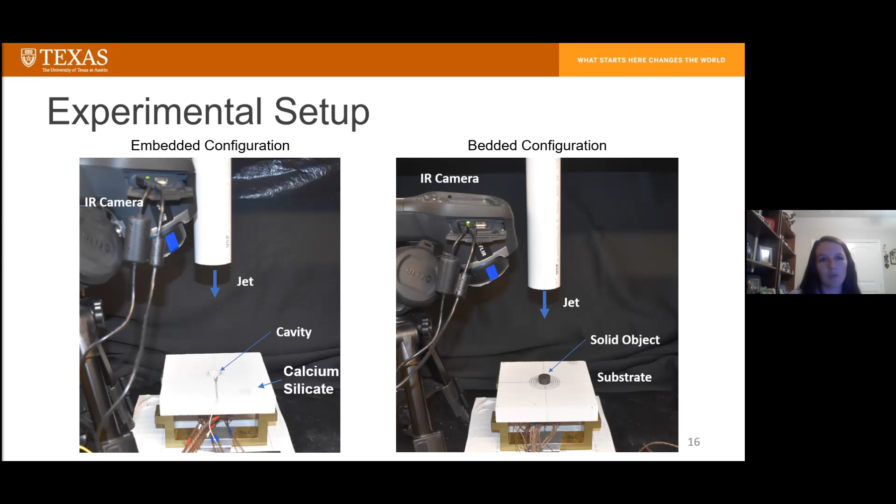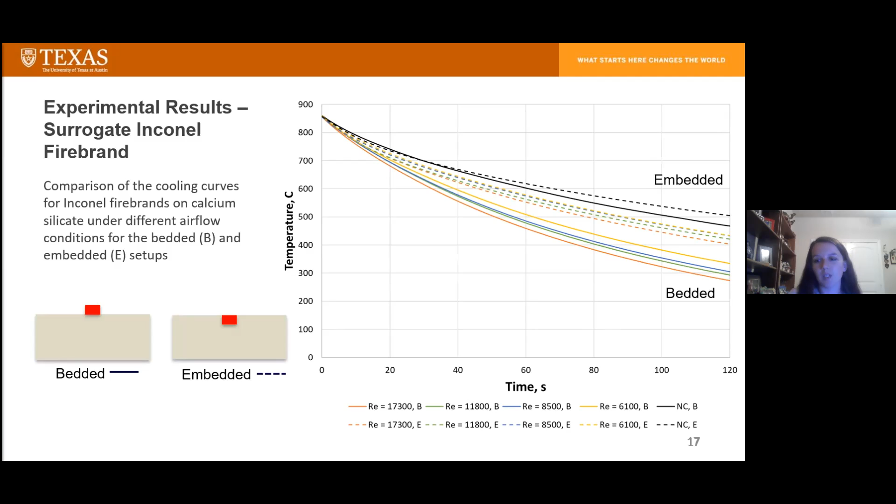So I conducted experiments with naphthalene sublimation in the same configuration to determine the heat transfer coefficients for the different airflow conditions. And then using an optimizer, using the known radiative properties, the known heat transfer coefficient, and the known cooling rate curve for a set of tests, we were able to optimize for the effective conductive resistance. And then that could be used to model further tests.

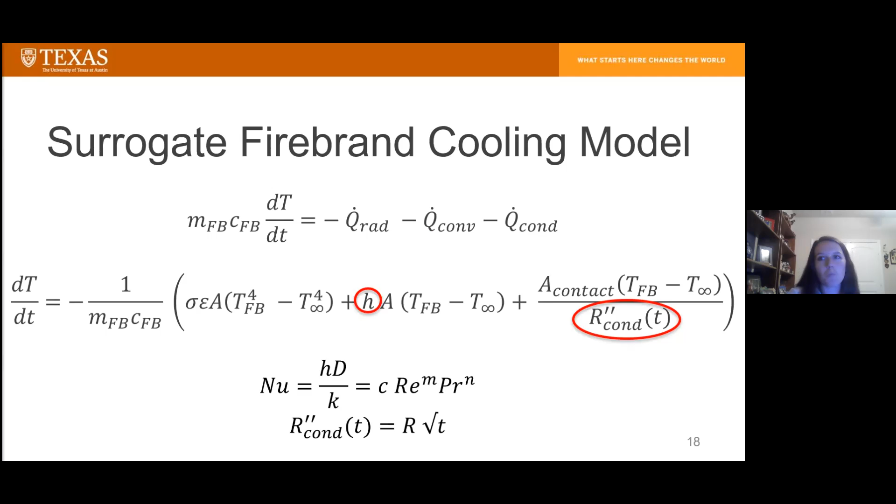And just to look further, the bedded cases were also run with 2 different substrate materials that were also non-reacting, stainless steel and aluminum. And when there was a higher thermal effusivity material for the substrate, we did see higher relative contributions from conduction that were more on the same level as the embedded case.

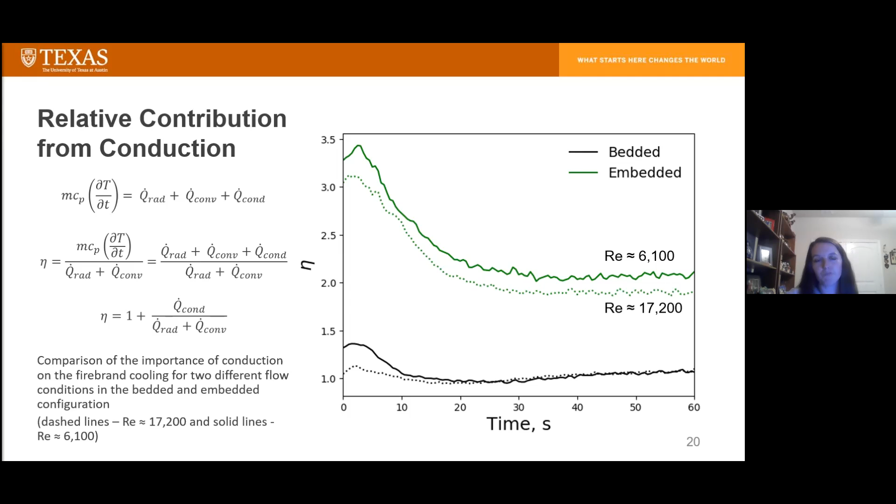So we found that the surrogate firebrands maintained higher temperatures in the embedded configuration. In the bedded configuration, conduction contributed little to the overall cooling, while conduction played a more significant role in the embedded firebrand cooling.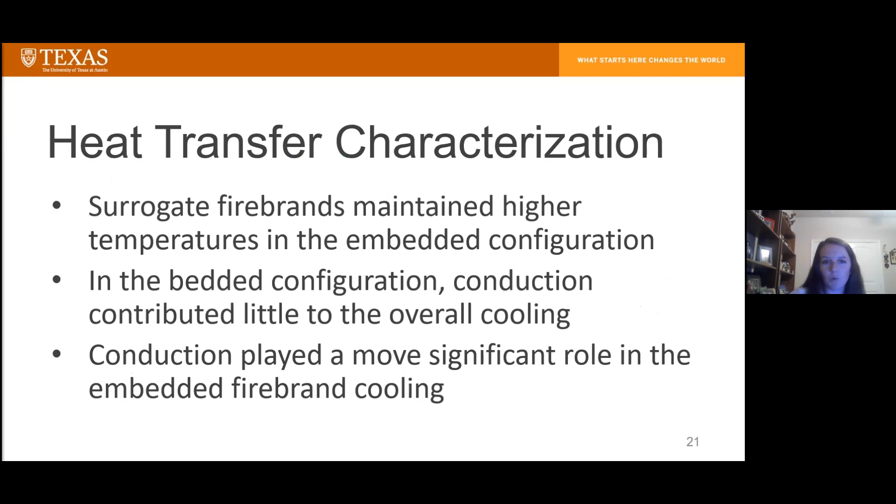And then my final work was looking at fuel bed ignition signatures. So in a lot of firebrand ignition experiments, or just ignition experiments in general, the definition of ignition is a little bit qualitative.

Like, we saw flames, that means ignition occurred, but I wanted to look for a more quantitative definition of ignition, because 2 different people could look at an ignition event and say, well, I only saw a brief flicker of flame, it lasted for 1 second, that's not ignition. And another person could say, yes, ignition is just if we see flames of at least half a second.

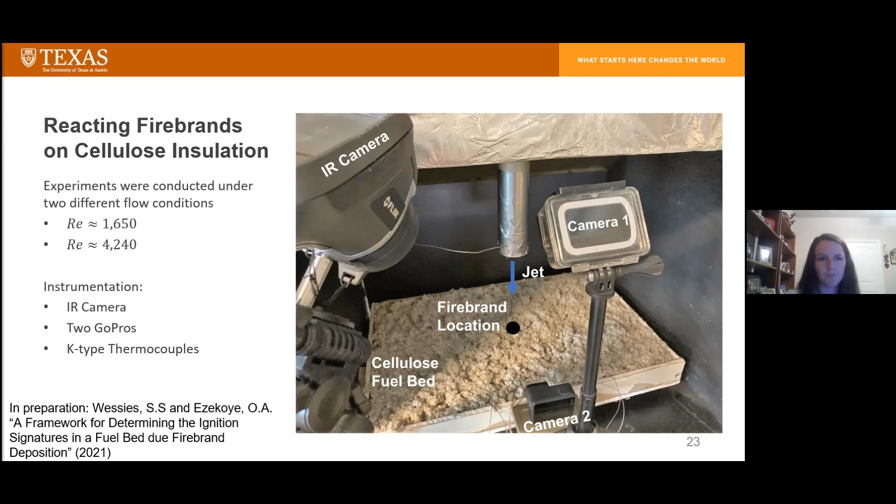So using the same impinging jet from the previous experiments that was well characterized, and cellulose insulation material as a fuel bed, and reacting firebrands that were the same size and shape as the surrogate firebrand, experiments were conducted looking at the ignition of cellulose material. The firebrands were produced in the same method in a furnace to ensure that flames visible in the test were from the fuel bed and not the firebrand. And 2 different flow conditions were tested.

We had an IR camera viewing this test, and the IR camera can be used to look at firebrand temperature, but it can also be used to look at the thermal propagation within the fuel bed. So if you threshold the image at a couple different temperatures, you can kind of see what area was above 500 C or above 800 C at a given time. And we can look at the time history of this for the course of the test to see how the thermal wave is propagating through the fuel bed.

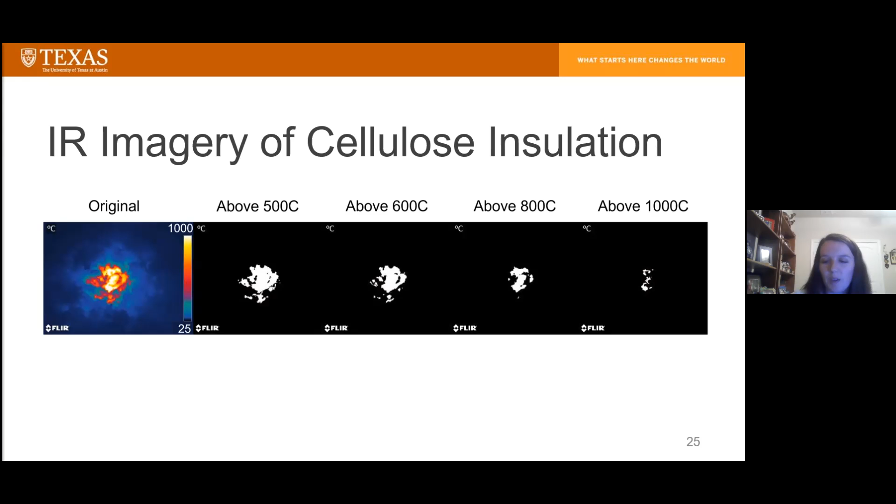So I introduced a non-dimensional reacting area to this: the initial reacting area, which was the initial area above 500 C, versus the current area that is above 500 C. And we look at this over time. So you can see this for the 2 different flow conditions here, and this dashed line indicates where I observed flaming ignition.

Looking at this plot, we can see there are straight line slopes. And whenever you see a straight line slope, you want to see what the slope is and what that growth rate is. This is just me eyeballing it, which isn't the best way necessarily, but we can see that on the left-hand graph there are 3 distinct areas.

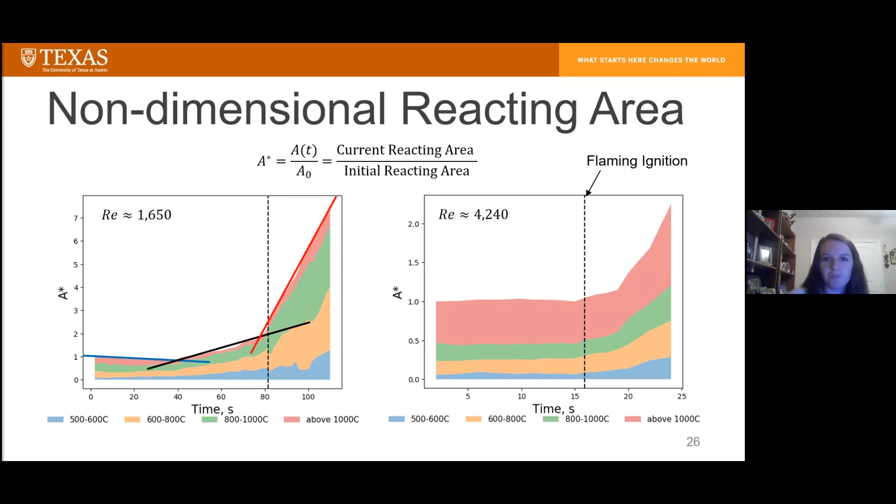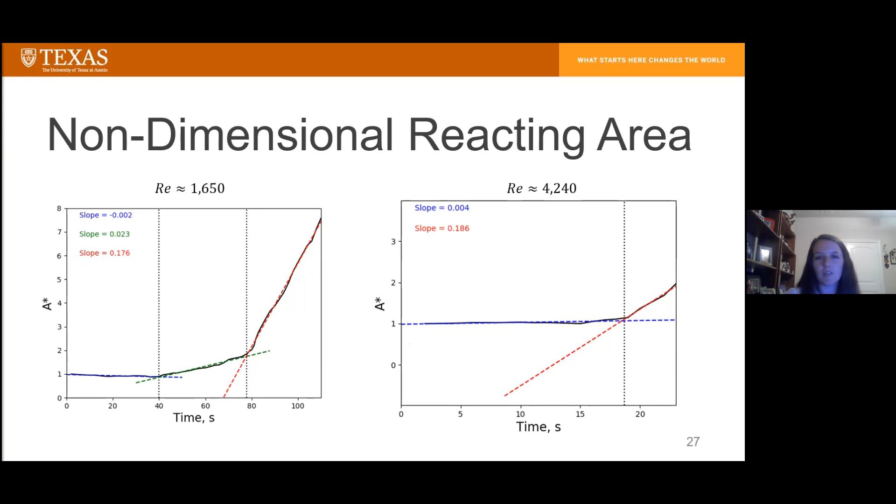Using an optimization method, looking at the times that were best for a split and the best slopes, and how many splits we would also need, I optimized for the slopes at each point to look at how the reacting area, the non-dimensional reacting area, is growing with time. The error cutoff was 5% for these cases. For the lower flow condition, we generally needed 3 phases to have less than 5% error, but for the higher flow condition, only 2 phases were needed.

As I mentioned before, we optimized for the times to the splits, and so that time to the final phase would hopefully correspond with the flaming ignition time, which would give us a more quantitative definition of ignition - that transition to a higher non-dimensional reacting area growth rate. Here at the bottom is the observed time to ignition by me as I went through the test data, and then the predicted time to ignition is from the optimization of the non-dimensional reacting area growth rate. There was pretty good agreement between the cases.

So that was my method for determining a quantitative definition of ignition in these tests. And then these 2 that are pointed out are the tests that were presented previously.

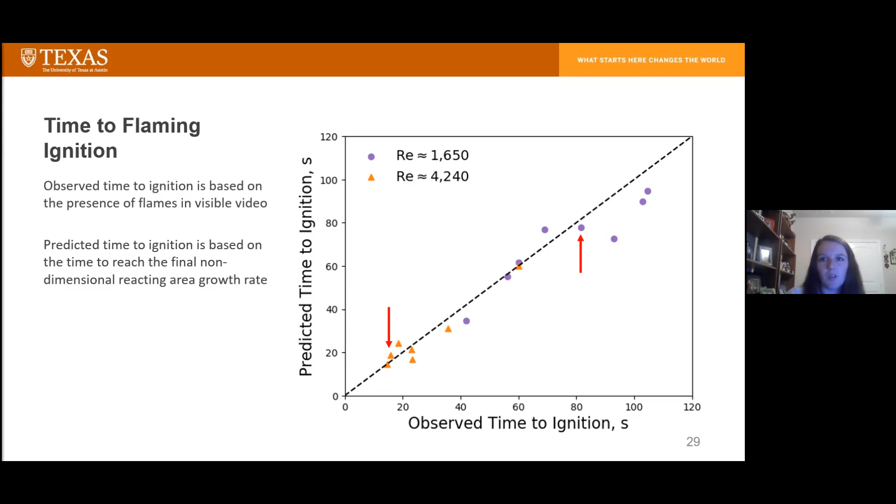So as I said, I was looking at what are the hazards associated with firebrand deposition in the WUI, and what threats do firebrands pose to structures. From my first set of experiments, we saw that airflow condition and geometric configurations affect ignition - increased airflow leads to higher firebrand temperatures and reactivity. From the hot body heat transfer, we saw it's very dependent on the geometric configuration, whether or not it's bedded or embedded. And the non-dimensional reacting area growth rate provides a quantitative definition for ignition.

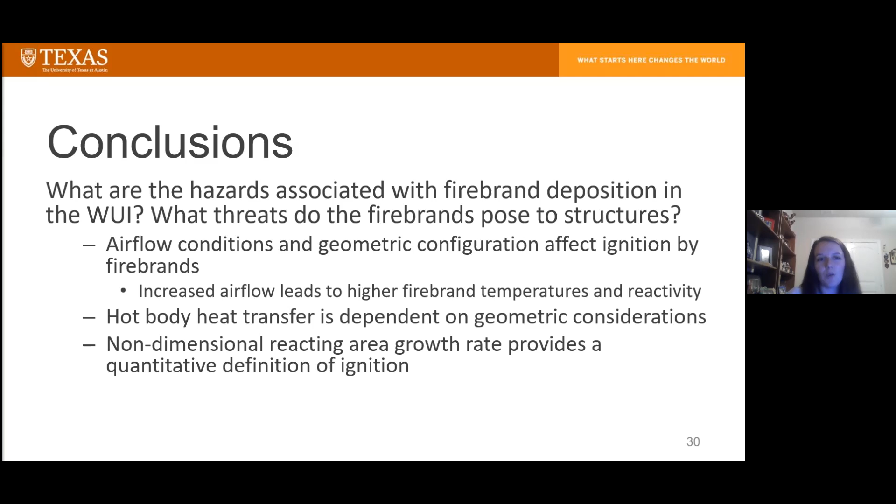All right, thank you, Savannah. That was awesome. Really kudos for going and developing your own convective heat transfer coefficient, because that's really hard work. Good job on that - and all of it. So there's a question in the chat box here.

Can you talk about the contact between the firebrand or firebrands and the substrates that were not smooth, like the denim, cellulose, etc., and if that affected the repeatability of the experiments?

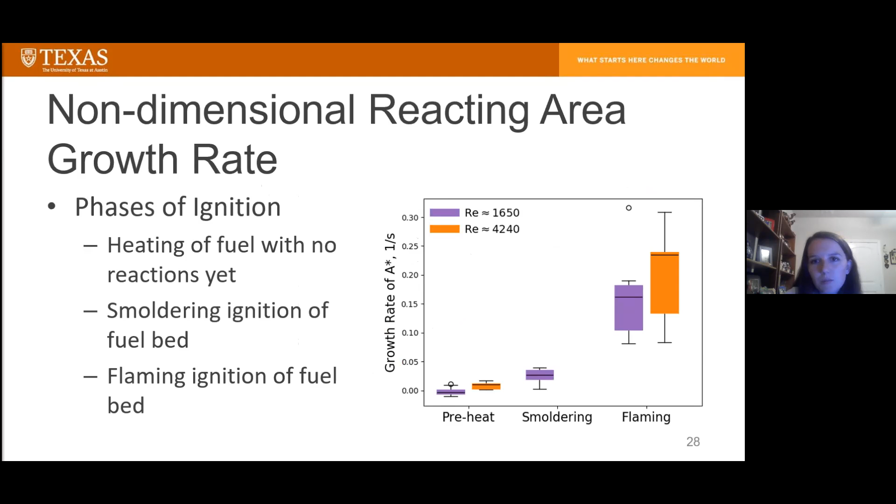I'm assuming that means my first experiments, so I'm gonna go back to an earlier slide. Here we go. So it would affect things, obviously. We did see more variation in the denim and cellulose ignition times versus the polystyrenes and the polyurethane, which didn't really see ignition. We saw a lot of variation, but we attributed that to differences probably in the flame retardant loading, because the flame retardants are added to the recycled denim and the cellulose afterwards, since they're recycled, so they add flame retardants afterwards. But I would say the contact area probably has an effect - the denim and the cellulose kind of deform as soon as the firebrand is placed on it, so it's soft, it conforms, and you actually have more contact area in that case.

Gotcha. I already have a somewhat related question here. As you were talking, it sort of dawned on me that it seems like in a lot of these cases you saw smoldering ignition before flaming, so flaming ignition was kind of a transition from smoldering. Was that true? Yeah, definitely, especially in the last experiments that I did the more in-depth study of ignition.

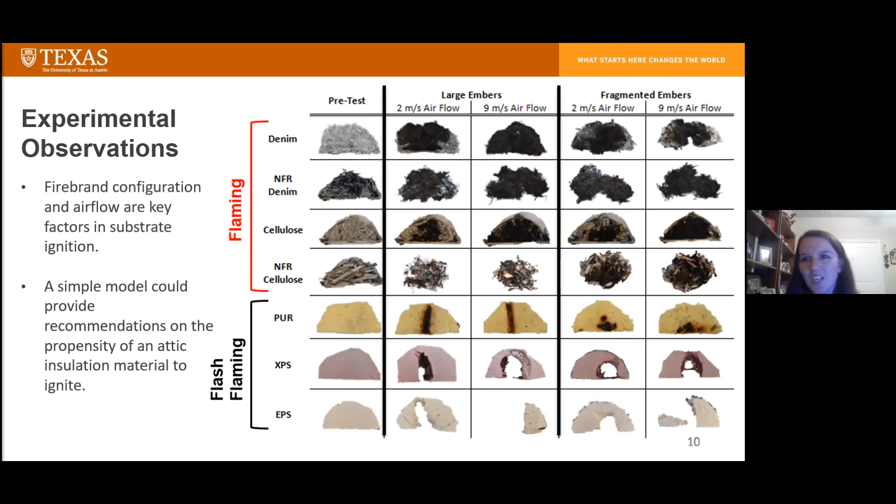Were there many that went direct to flaming, or very few? In the cases with the higher airflow condition, yes.

So this one, clearly there was smoldering before, and you would generally see the flames at the edge of the reacting area. But in the cases where ignition occurred quicker, it was generally closer and there was just all of a sudden flames. In some cases, there would be a little island of char that you would see, and that might be where ignition occurred, based on how the thermal wave was propagating through the material.

Right. Oh, makes for a complicated problem for sure. Yes, for sure.

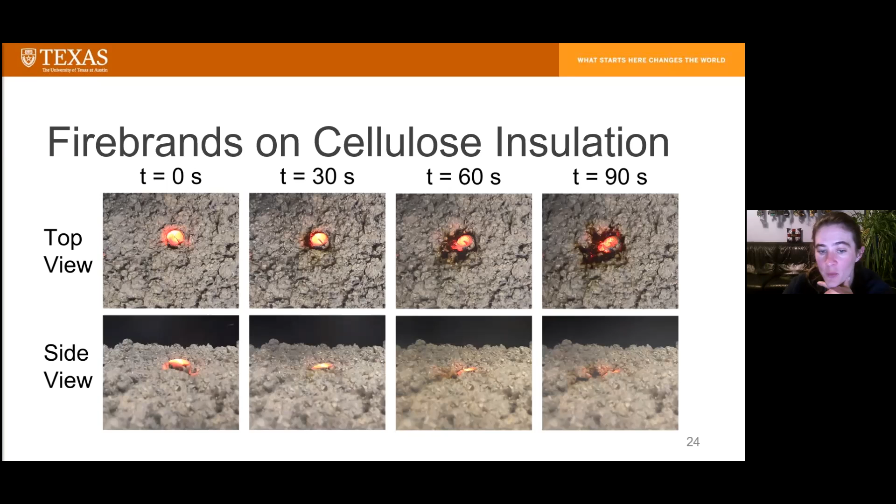Awesome. So if there are no other specific questions about Savannah's work, Sam had one for all three speakers. He asked: you believe you had many choices of topics for your PhD, so what brought you to studying fires? Savannah, since you're up, do you want to answer that first?

Yeah, so I got into engineering because I liked science and wanted to help people directly with my skill set. That's what drew me to engineering. In grad school, I honestly didn't know fire research was really a thing until I came to UT, or was looking at UT and saw the UT Fire Research Group, and I was like, wow, that's awesome, I'd love to study that. It's also very prevalent in the news throughout the year, and it seemed like a great way to put my engineering skills to use and actually help someone, maybe not today, but one day. It felt like a more real-world applicable research avenue for me.

Nima, do you want to answer next? Yeah, sure. My major in civil engineering was computational mechanics, so it was about simulations, but definitely not in fire. I always wanted to work on the risk side of problems at urban scale, but never thought it would be with wildfire as the hazard. When the Tubbs Fire happened, we started reading about it, and as we went through it, it got more and more interesting. The topic is demanding, and we need to find practical and timely solutions, so that's why I stuck with it, and I'm pretty happy with my research.